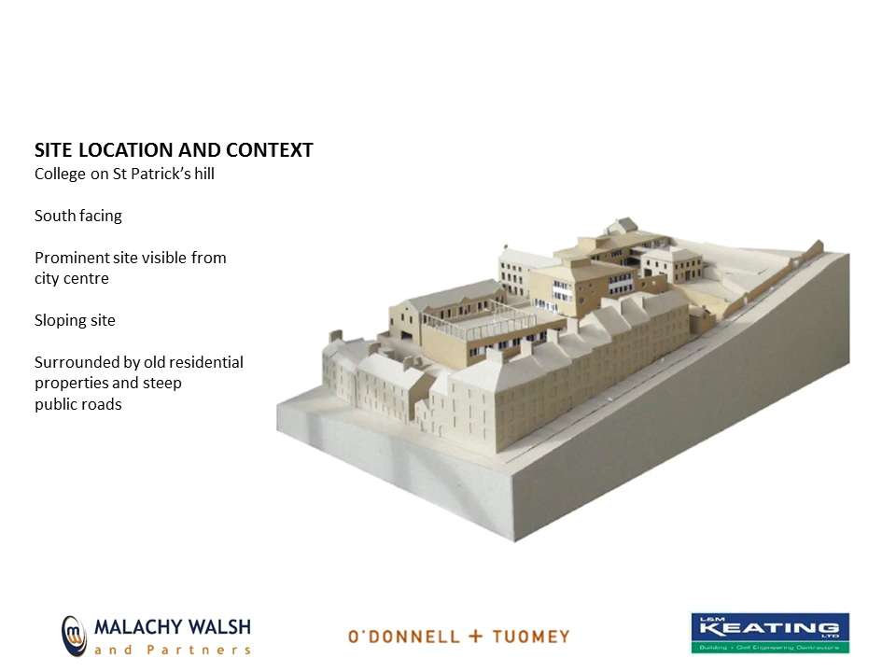This is looking from the south-east up the hill towards the college, and the darker cardboard buildings are the new and existing buildings. The site is very, very stepped due to the steepness of the topography, and it was a real challenge for the architects to fit in all of the square area needed for a college of this size and work within the department's area schedules to convince them that it could be done to a modern standard.

It's a prominent south-facing site, and you can see there's buildings on the south, which is the lower left-hand corner, buildings the whole way up the east side of the site on Patrick's Hill. There's a public road on the far side, on the west, and there's a private property very tight to the northern boundary of the site as well.

Just to give you a feel for where we are in relation to, that's Patrick Street, the main thoroughfare, the main commercial heart, if you like, of Cork City Centre. And the site is visible from pretty much most of the city centre. So I think the architectural design and the finished product really was very important to get right. And the architects worked very hard to do that.

Again, just to give you another sense of the tightness of the site and the slope of the site. Patrick's Hill is on the far side. The buildings there, just running up here, and this is Richmond Hill on that side. So you can see the site and the neighbours. Communication during the design development phase was very important for the design team to get right, because if you didn't get on with your neighbours here, the project wasn't going to be successful. And I think to date we've managed that between us all.

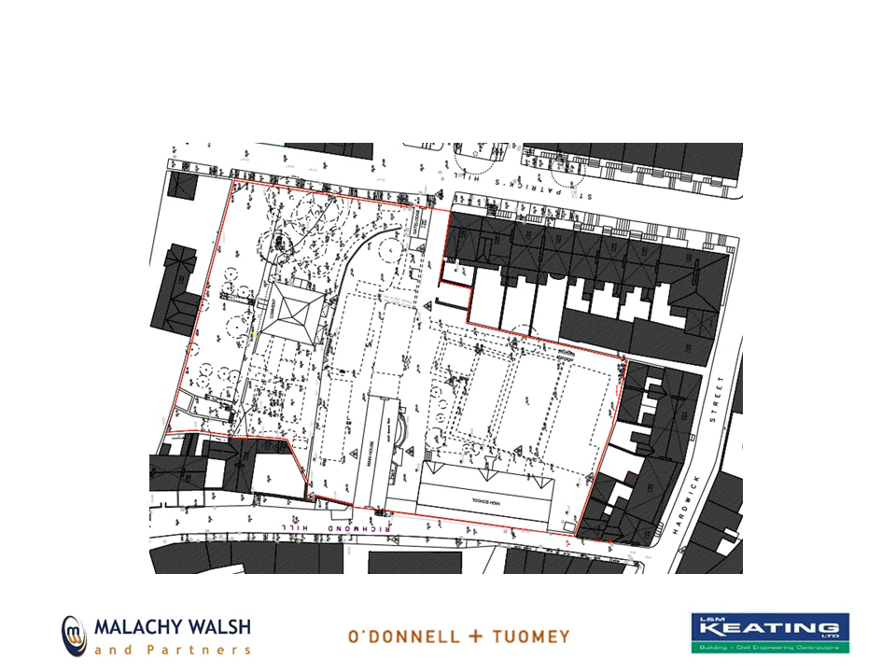Site constraints and challenges. Access onto the site is via a 4 metre wide, at its widest, road straight off Patrick's Hill, where the hill is at a slope of 1 in 4, so it's an extremely steep part of Cork City. So getting onto the site, David will go through that in a minute, has proved very challenging, and even in terms of site investigations and everything that had to happen during the school academic year, it made things very difficult.

All the boundary walls are old listed masonry walls, random rubble masonry walls, most of which had no foundations at all under them, and part of this project required that we would dig up to 6 metres, I think, was the deepest excavation, within a metre of these walls that had no foundations under them. And these walls aren't owned by our client, they're part owned by our client. So the party wall issues and the third party property owner issues were very important to get right.

The listed buildings, there are 4 buildings, they're shaded on this sketch here, and those buildings were kept during the construction and have been amalgamated into the overall design and final use of the site. So the project really involved civil engineering in terms of excavation and underpinning, careful restoration of existing listed buildings, which had the conservation officer in the city council carefully involved as well at times, in terms of agreeing with him the detail of how we would do that.

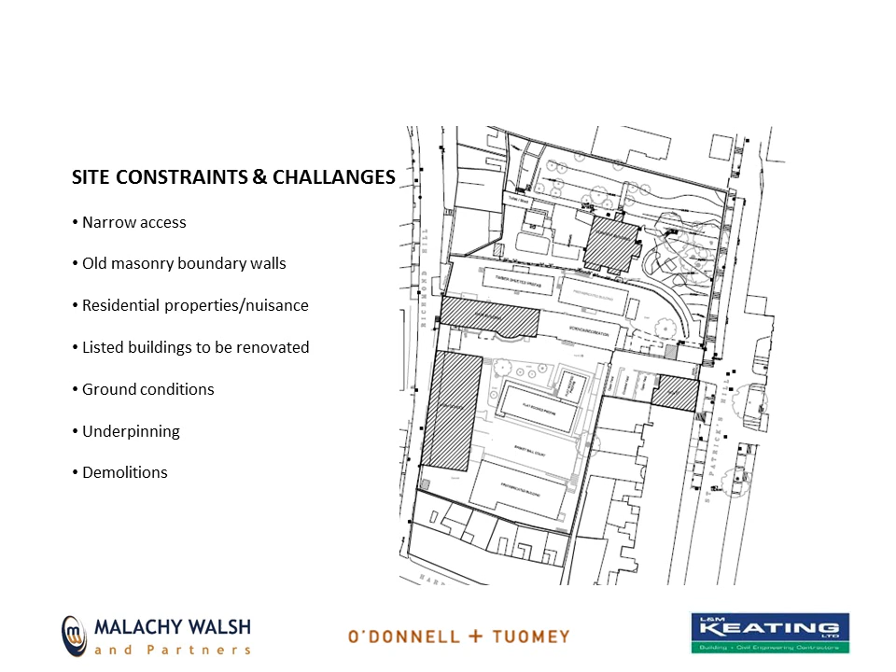There's a PE hall with a playing surface on the roof, and there was a bit of negotiation with the department. They have a rule, as I understand it, where only 10% of the roofs can be flat roofs. So we had to convince them it wasn't a flat roof, it was a playing surface. So that took a while to convince. But all of the other new roofs are pitched roofs on the site.

There's a 4-storey science block, which goes to 6 storeys actually. It has 2 below the ground and 4 above the ground in one part of the site. There's a new arts block, which is between 1 and 4 storeys, again 2 under the ground and 2 above. There's an escape stairs building. There's link bridges between new buildings and old buildings. And there's the alteration and upgrade of the 4 listed buildings, as well as external works. They're the main, if you like, engineering elements of the project.

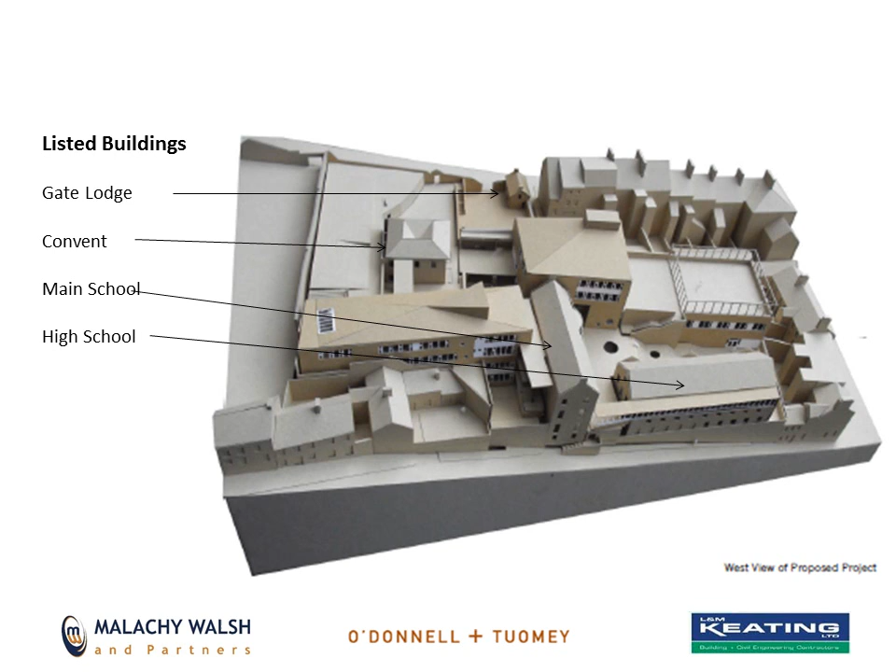The new buildings and external works essentially split into those sections. You can see there the new entrance from Patrick's Hill, incorporating a car park and new retaining walls, a 4 to 6 storey science block, PE hall with external playing area on the roof, the arts block, which goes from the very back north edge of the site and steps down over a number of levels to meet the back wall of the old main school.

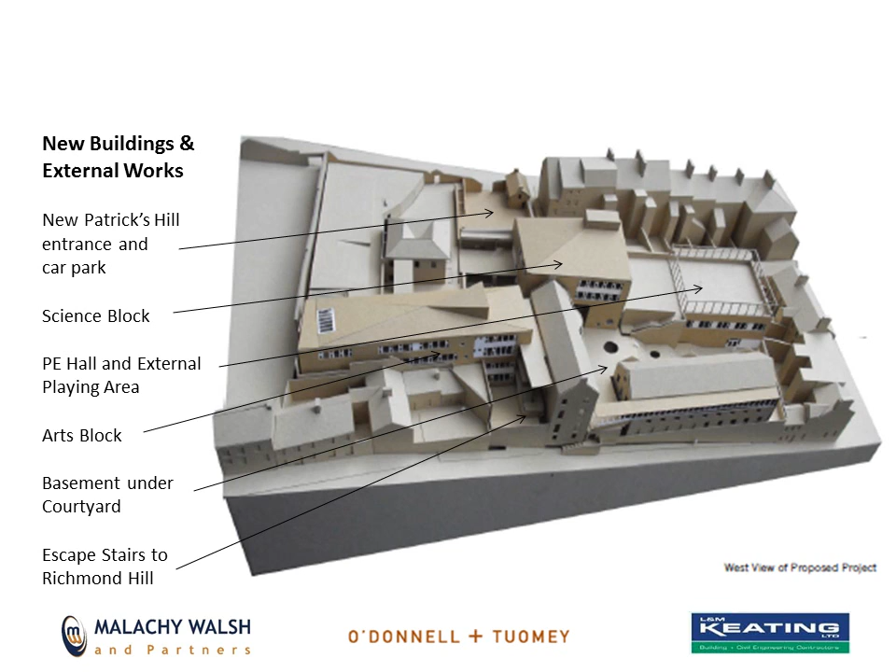Cork has 2 types of rock. You've got red sandstone on the north side of the River Lee, and you've got karst limestone on the south side of the River Lee. And we're literally a couple of 100 metres on the north side on the escarpment that forms the northern edge of Cork City, that you can see right as you go into Cork from the Dublin Road. You see it right from Tivoli, through to Sunday's Well and the Lee Road. So the north edge of Cork is formed on this cliff, if you like.

So in places we were digging out rock up to 4 or 5 metres, and in other places our foundations were 3 or 4 metres above the rock level. So that in itself was a challenge in terms of differential settlement for new structures on the project. And we'll explain how we overcame that.

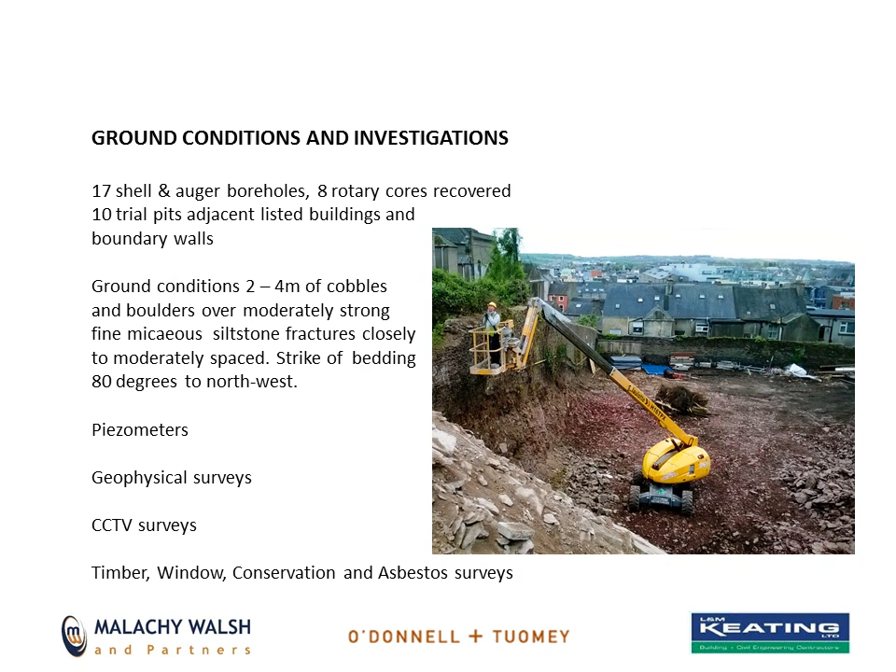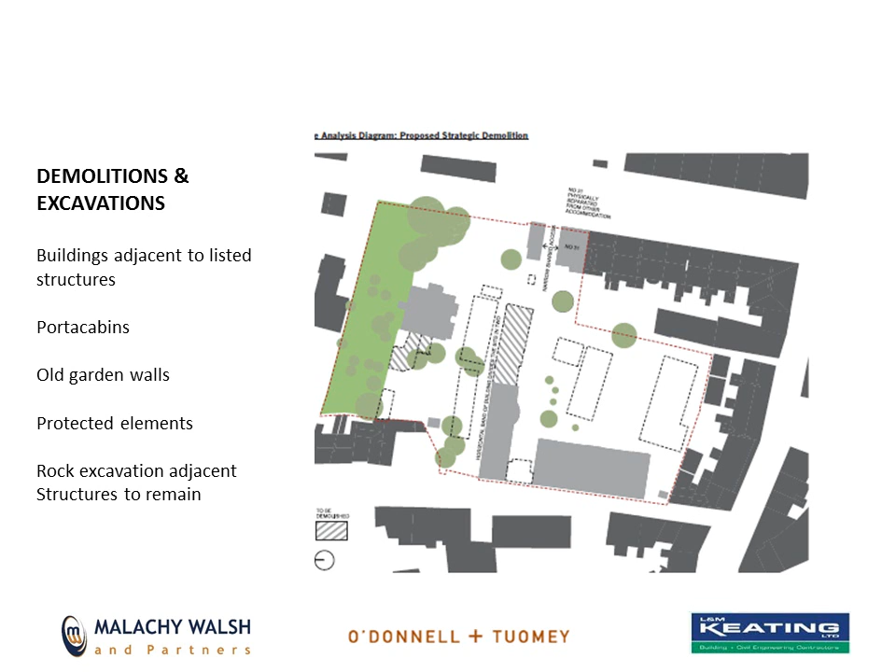Some of the buildings were adjoining old listed buildings, but the structural connection was almost non-existent. So really, I don't think the demolitions were that difficult. Probably the easiest part of the job. I suppose just to get into some of the detail and give you a flavour for the approach that was taken to temporary works and construction.

So with the contractor, we came up with a temporary works design to support the arches, literally hold up the wall, put in permanent works steel beams for a new first floor structure. We put those in early because they gave us temporary lateral bracing on the building, and we got agreement with the conservation officer and the city council to replace the brick piers in this building, and that allowed us to underpin the walls by making a new foundation under those piers, rather than trying to hold the piers in place and get a foundation under them and extend that.

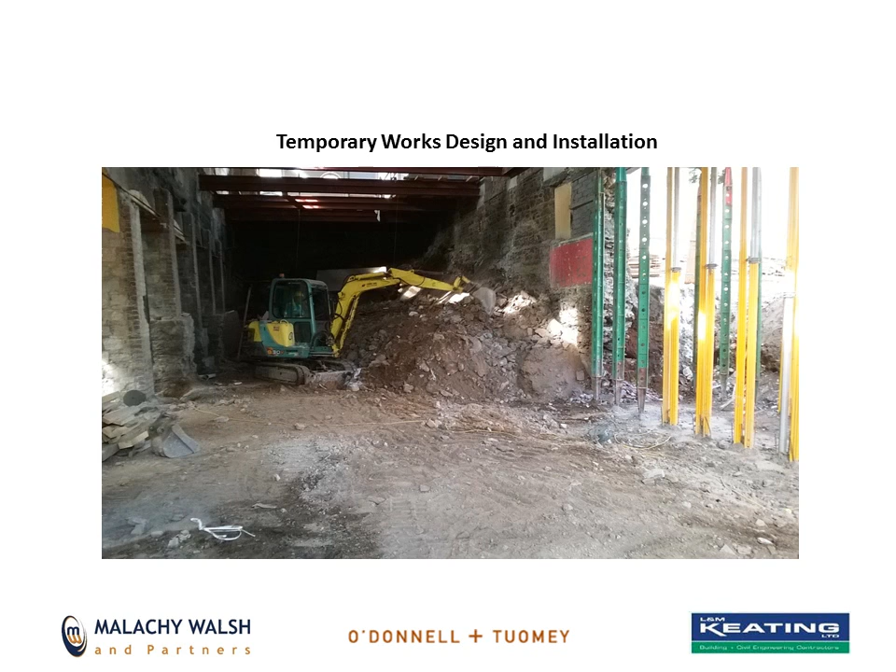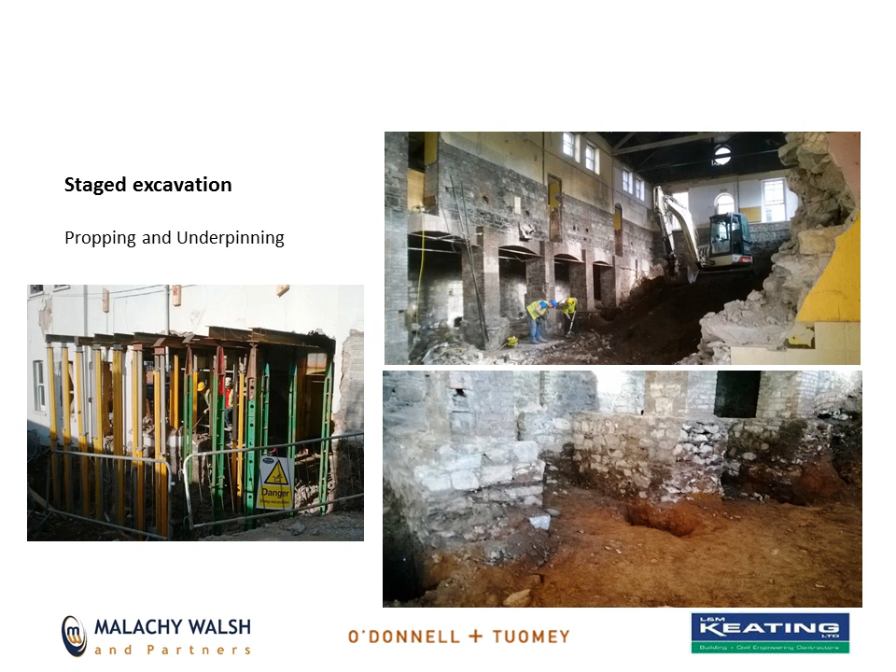Just a general shot to show you the level of excavation that had to take place, and some of the temporary propping that you can see there on your right. So a good bit of care had to go into the whole construction sequencing there to make sure that was done right. Again, just some other general shots showing the propping and underpinning, using tried and tested traditional techniques for needling walls, holding walls up above where you want to put your new structure, and then traditional underpinning.

The main school, which is the original building on the site, again, you can just see a bit of the scale. The original ground level is this line here, and we had to excavate down to the bottom of the wall, and we had to go another maybe 1.5 meters or thereabouts to get down to our formation level. You don't see these walls until you go at it, and that's just the way of life when you're dealing with old buildings.

Until you actually build it, you're not sure exactly what you're going to find. So I think one of the secrets to it really is a high level of engagement with the contractor, so that you're constantly reviewing what you're finding, and you're progressing construction techniques that are buildable in terms of the program and cost, etc.

And here you'll see this is traditionally underpinned. I think a lot of this actually is some of the tanking. There's a basement behind the other side of this wall, but we traditionally underpinned here using letterbox shutters in a hit and miss stage sequence to bring the walls down to a good bearing surface on rock. So again, tried and tested techniques in a lot of places there.

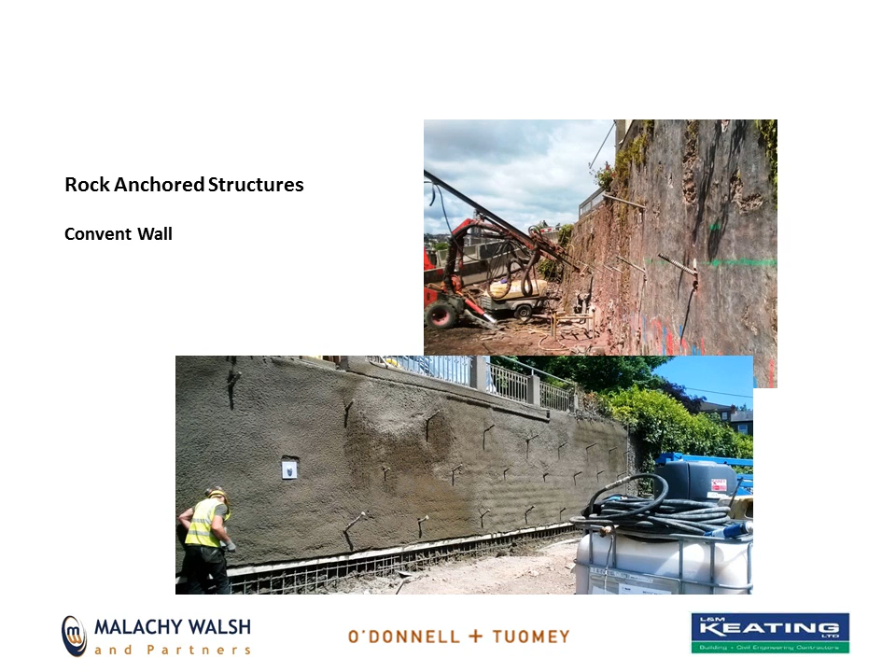So those rock anchors went in, and they were really only needed for probably 3 or 4 months, as the main building was built in front of it. Those walls are all in now, I think, David, at this stage. So that wall is now propped in the permanent case by the main structure. So those anchors are redundant, but I think it was the only way to do it at the time.

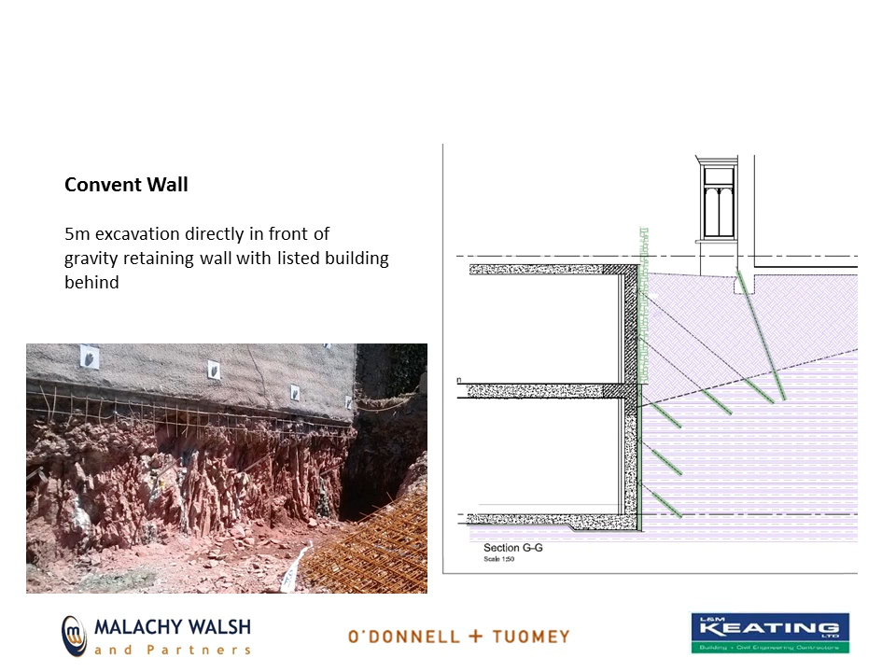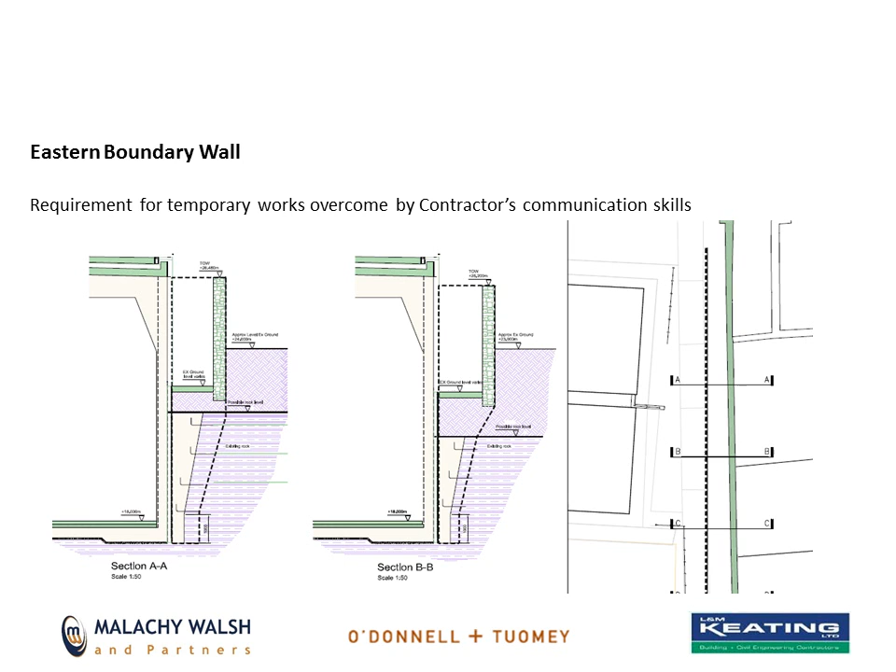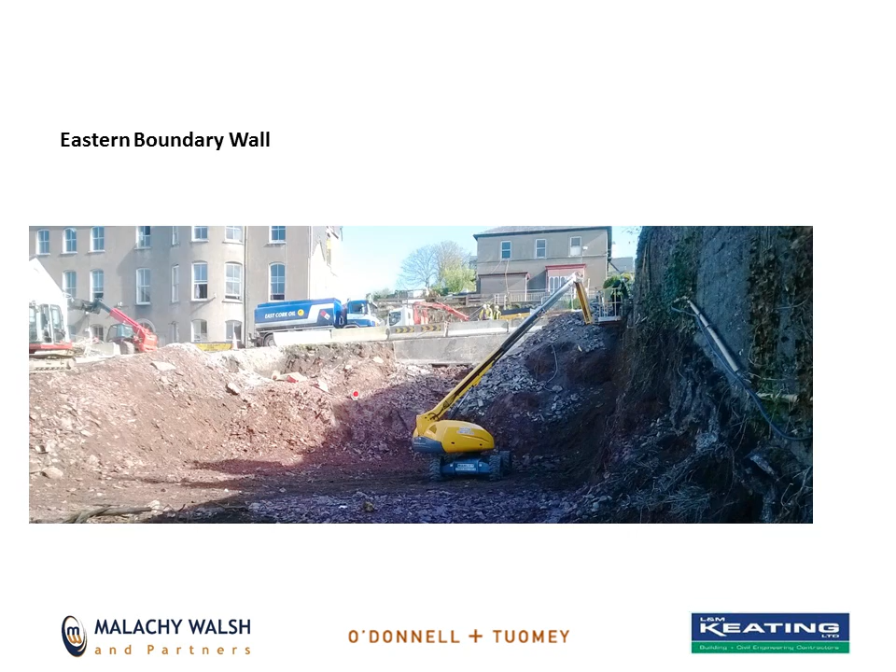Retained buildings, I suppose this is just a general view showing the typical type of intervention. There's a new basement where this little mini digger is here. There's a new basement structure going in. It's probably got another metre or two, probably 2 metres to go down before we link into the front of the old main school there. So again, a lot of intervention and carving out new openings and propping and supports.

And then the photograph at the bottom, just a general view again, that's the old main school on my side on the left, and this is the new arts block. And the architects wanted the new clean concrete, completely unblemished, finished surface building to come straight up against the old stonework, so you had a contrast. And there's just a very, very small joint between the two, but they're completely separate structurally.

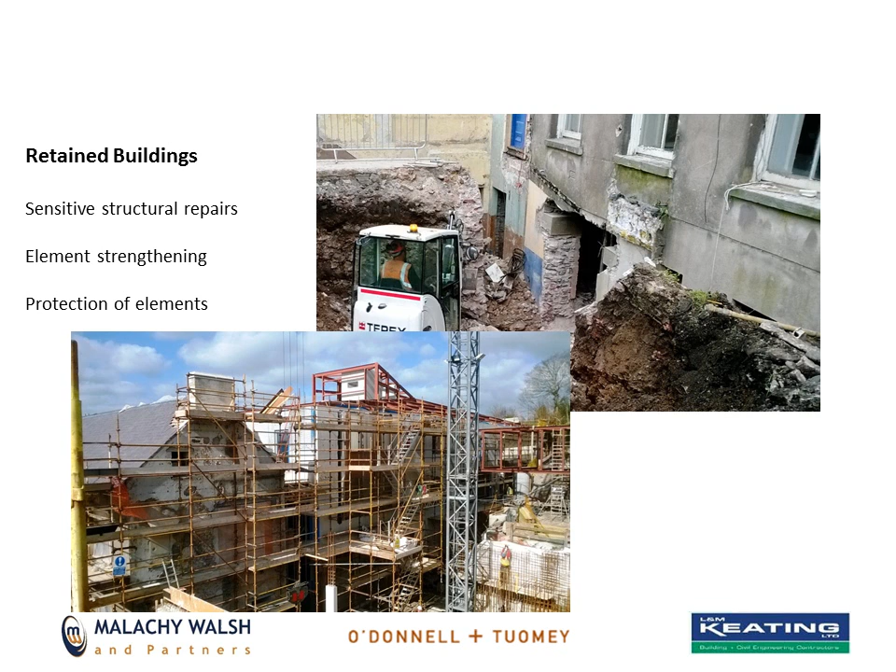Just a few general shots. That's the main school from the front in the middle there, and from behind you can see how slender and tall that whole building is. The building just on this side, just from here across, that was demolished. That wasn't part of the curtilage of the listed building. So that was demolished, and we've built in and wrapped right around on 3 sides with our new buildings around that building.

There were listed stairs that had to come out, and new floors went in, and strengthening of existing floors and assessment. The assessment of the old floors is interesting because these buildings were built using very strong hardwoods that used to come up the river, and we've done a lot of old buildings around Cork, and actually the strengths you can get out of the timber are way in excess of your C16 and even C24 timber. And the timber is in excellent condition. So, it was actually very easy to work around the older elements of the buildings.

Then we found some of the more modern interventions were in a poorer condition than some of the older elements. And I think there's a lot to learn there in terms of the old trades and how they used to do their work.

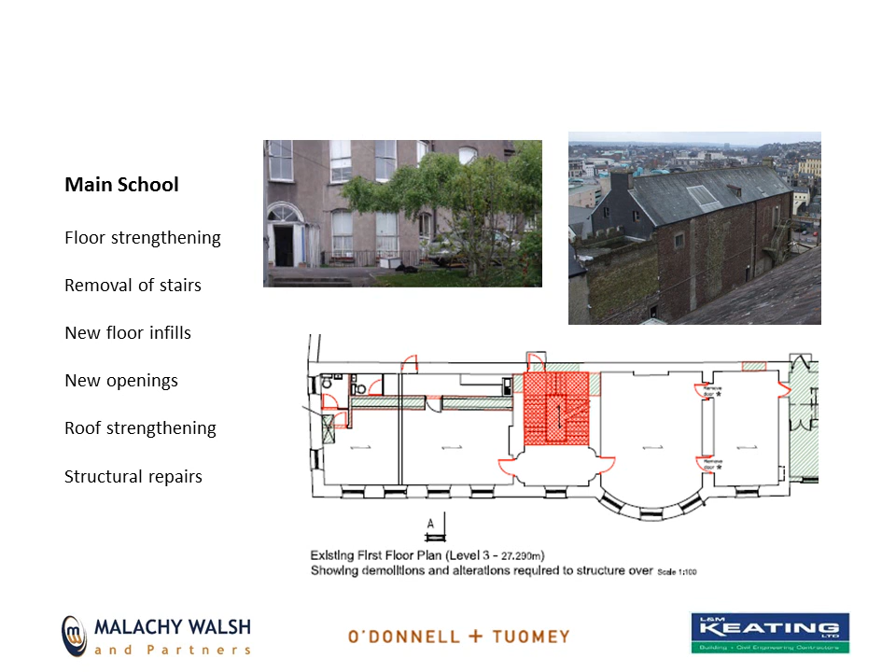The main school, just a general view again of this, the top picture is a view looking down the western boundary of the site, and that's a listed facade. So anything we did had to treat that very, very carefully. But it's in very good condition, and really I don't think that wall needed any structural improvement at all. It's absolutely fine as it is and always has been. Again, a testament to the original builders.

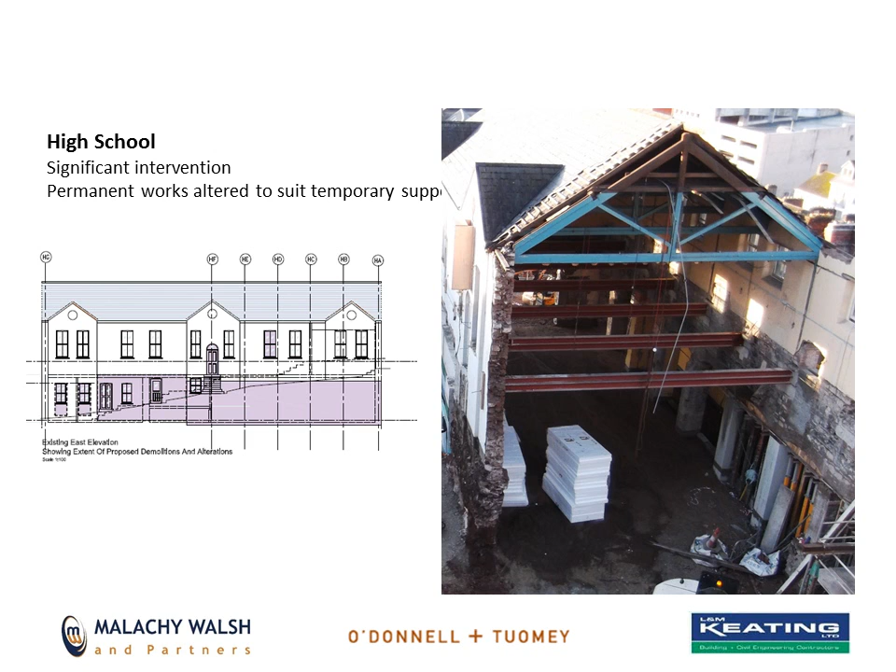So they just had to be convinced that from the new car park into the school, that was Part K compliant and Part M compliant. But the minute you came to the gate and came out, we just couldn't meet those requirements, and they had to accept that.

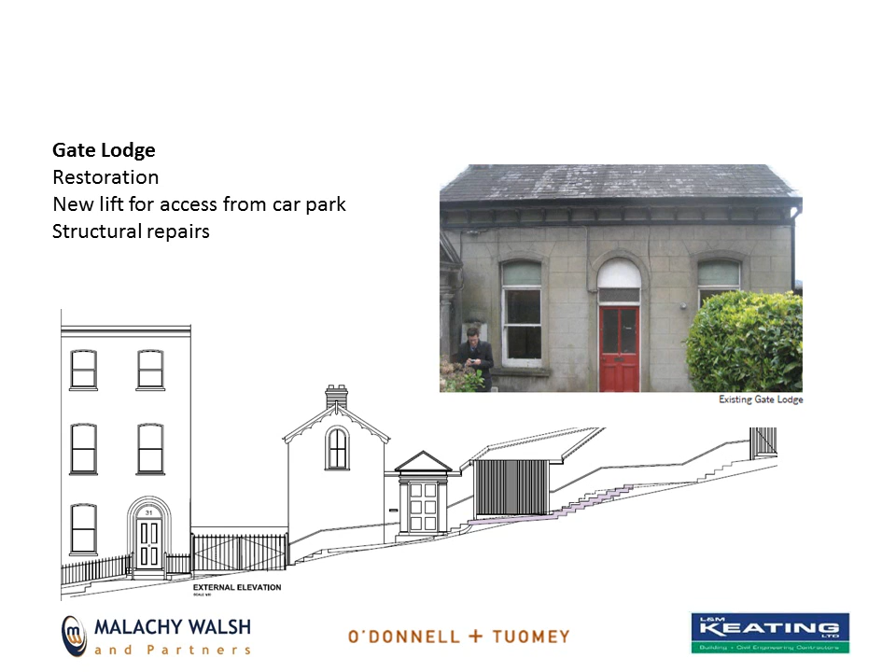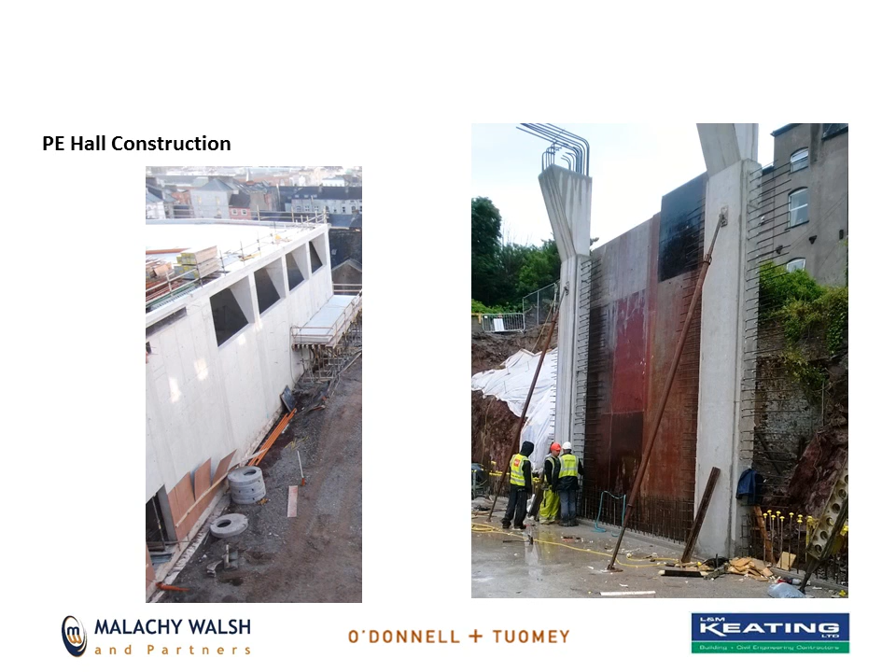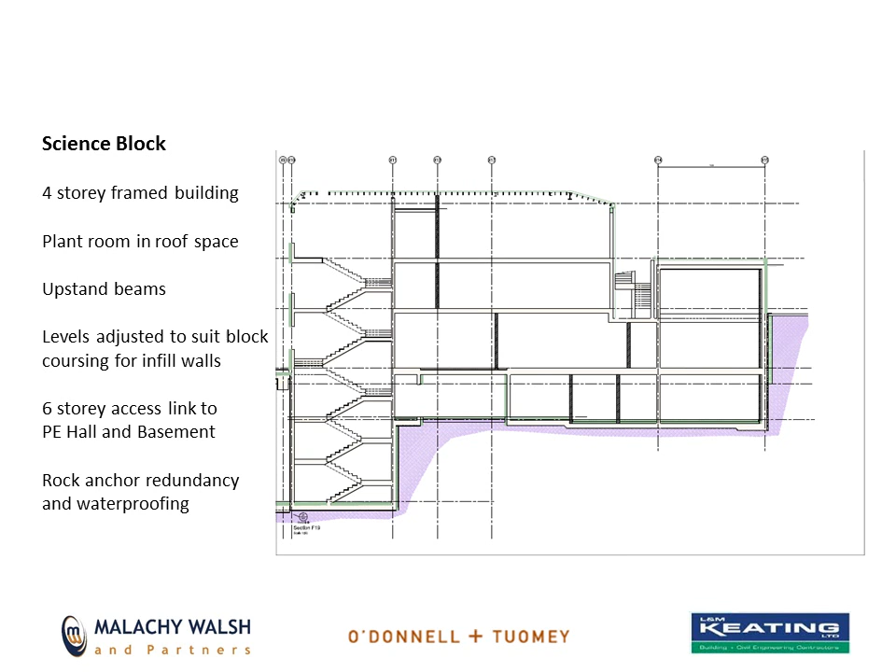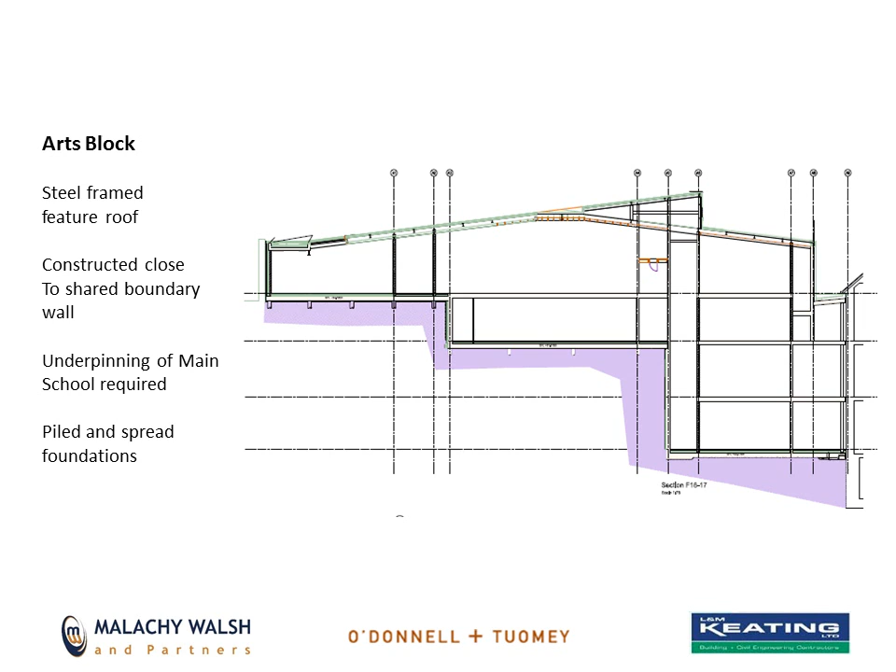Now the piles aren't there for weight. There's no real weight on those piles, but we were just concerned about differential settlement, so we kept it fairly simple. You're either on rock, you're on lean mix on rock, or you're founding on piles, so that you're not getting differential settlement. So the upper two steps there were piled, and then we were down into rock bearing foundations from there on. That was the only part of the project that was piled.

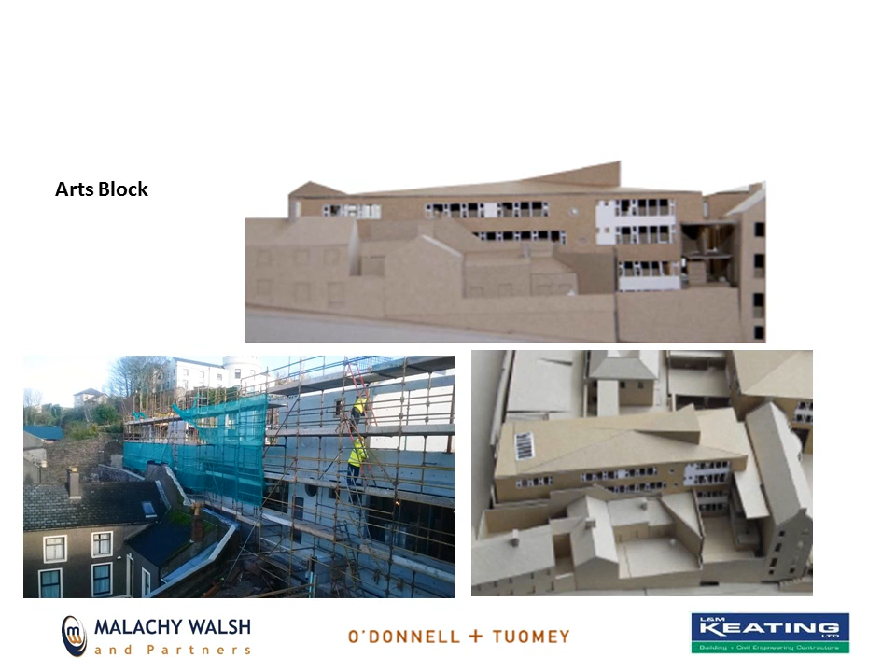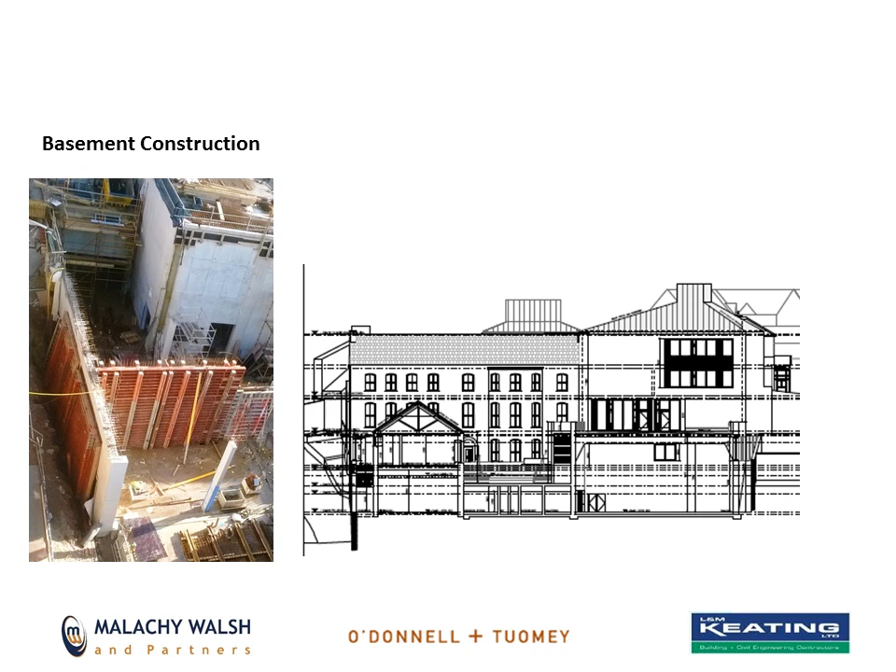Okay, thanks very much. I hope I haven't gone over my time. I'm going to hand over to David. Thanks a lot.

Good evening, everyone. My name is David McCarthy, and I'm working for L&M Keating, and I'm the project manager on the St. Angela's job in Cork.

So L&M Keatings, we're a building and civil engineering contractor. We're based in Kilmihill, County Clare. We also have a regional office here in Dublin. The company was started up in 1987 by Louis Keating, who is a fellow of the Institute of Engineers. We're operating in Ireland and the UK, about 80 direct employees, and turning over in the order of 40 million and continuing to grow.

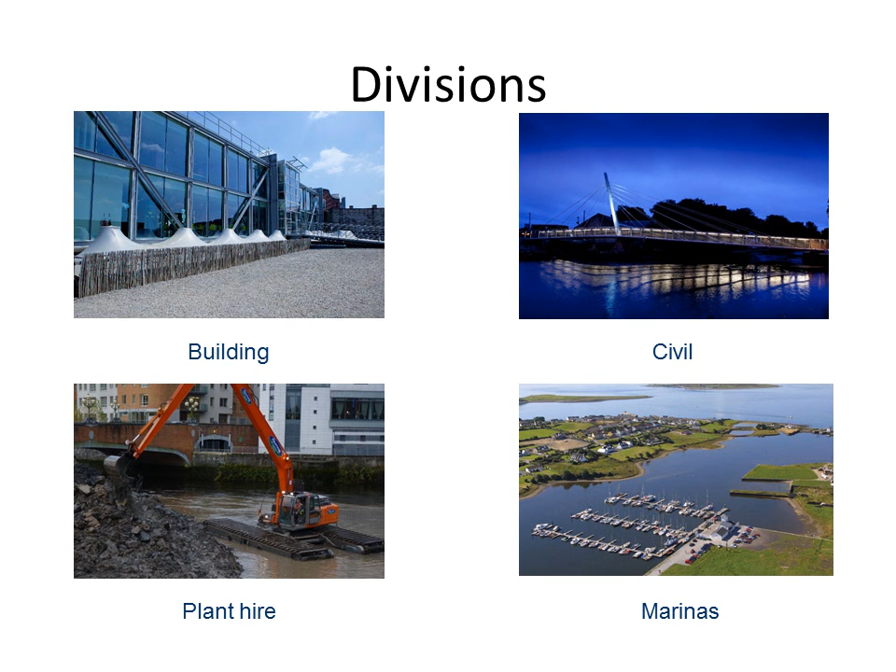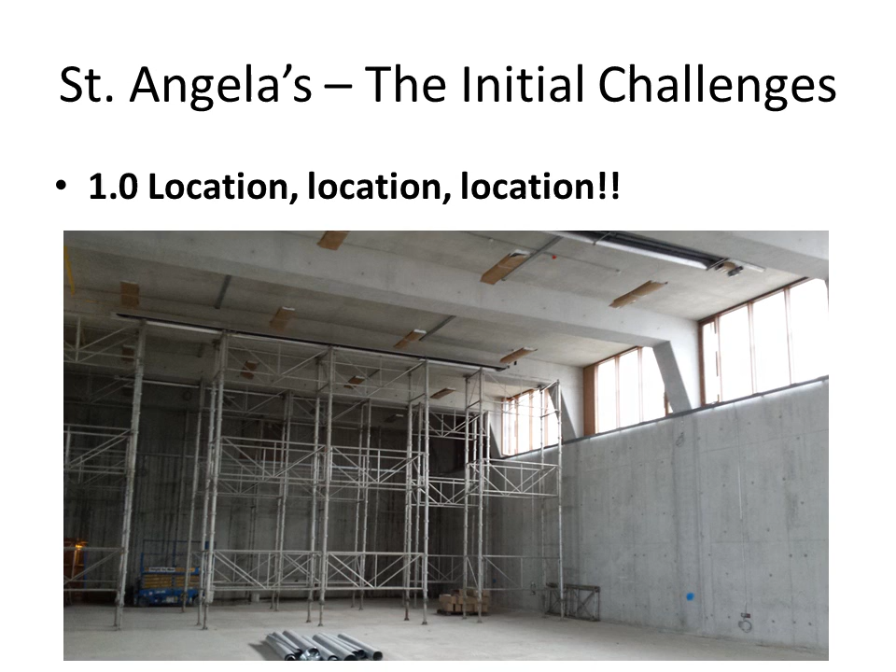In fact, we've had to use part of the permanent works. We've used the roof slab of the PE hall as a temporary lay-down area and work area. So we've gone through some temporary works designs to improve the load-bearing capacity of the north section of the roof and used it for storage after that. Access is from St. Patrick's Hill only. It's actually too tight for artics. We can't get any artics onto the site, which does cause numerous problems, in particular for the reinforcement steel. All the rebar is bent in Dublin by our supplier. It has to be transported by artic to Cork, transferred at their depot to rigid trucks, and then brought onto site as required.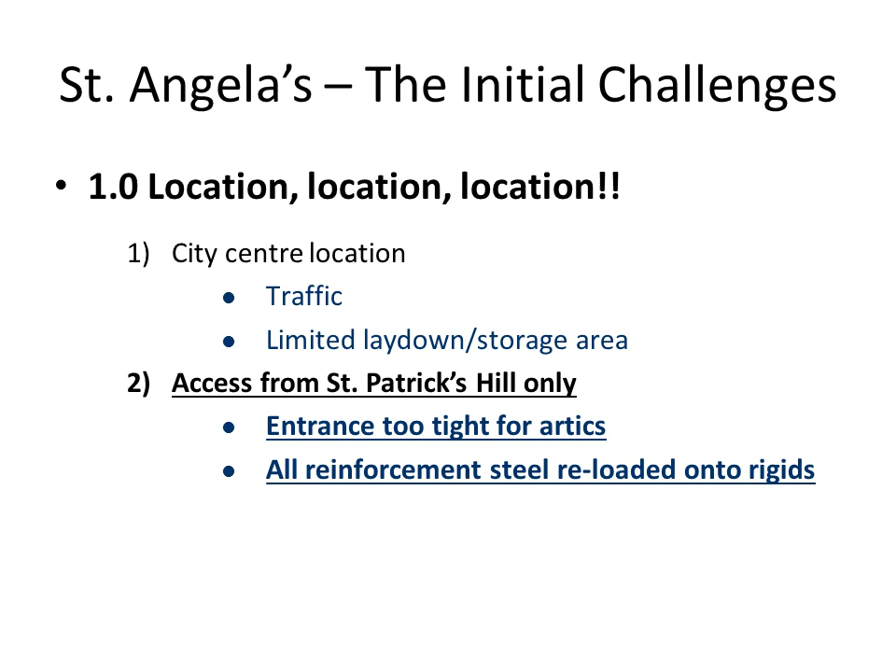We're also bounded by private residences and schools, which causes difficulties from the point of view of noise and vibrations. There's a high pest factor, if you like, in continually rock breaking and creating noisy activity on site over several months. There was a prolonged stage of rock breaking on the site.

So we are very grateful to our neighbours that they have been patient with us. But we have made concessions also, particularly to the schools. There's about 5 or 6 different schools within a stone's throw of the site. So during exam periods particularly, we have made concessions to suspend very noisy work to more suitable times.

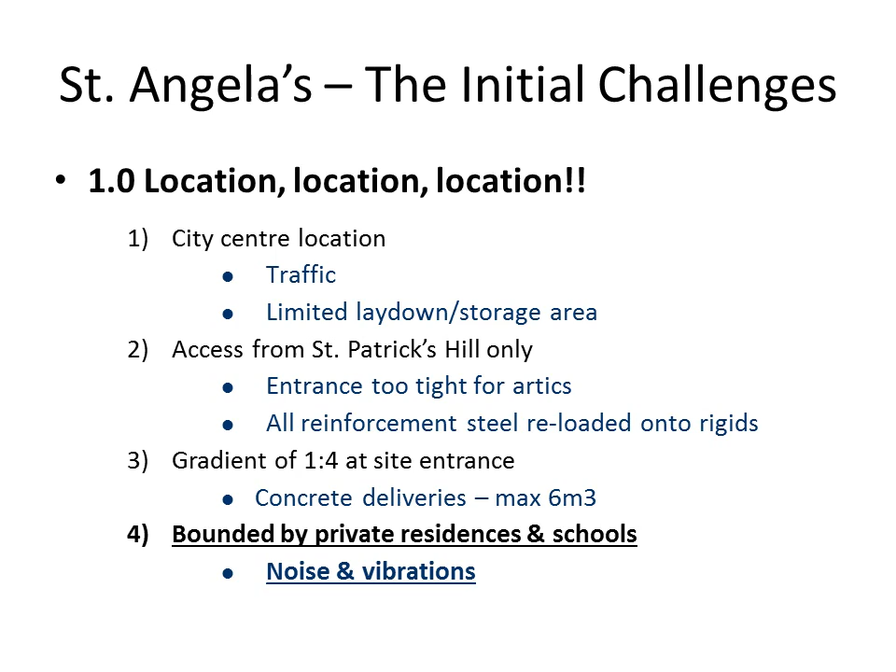The topography of the site is steeply sloping, as John has elaborated on earlier. There are in fact 5 distinct formation levels in close proximity, so there's essentially shelves cut into the side of St. Patrick's Hill to take the structure. And the proximity of these various formation levels means a requirement for a lot of retaining structures between these formations.

I'm just showing a section here which John probably has shown earlier. Apologies for a bit of duplication, but I'll try to concentrate on the construction element if possible. This is a section cut north-south through the site. So down the left-hand side you can see the south end of the high school with its ground floor level at level 1, and then up at the right-hand side we're looking at the north end of the arts block. And the formation level up the north end is at level 5.

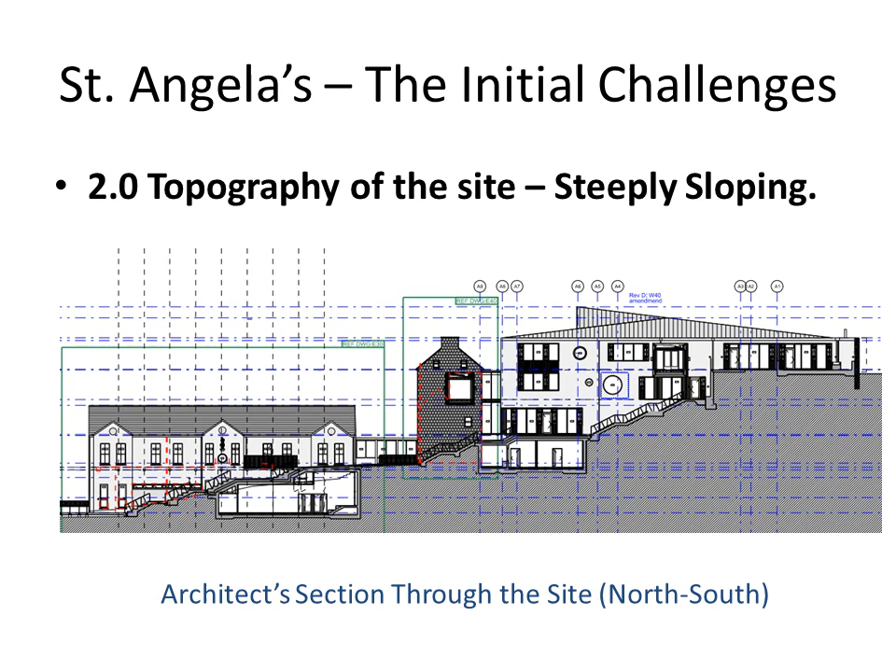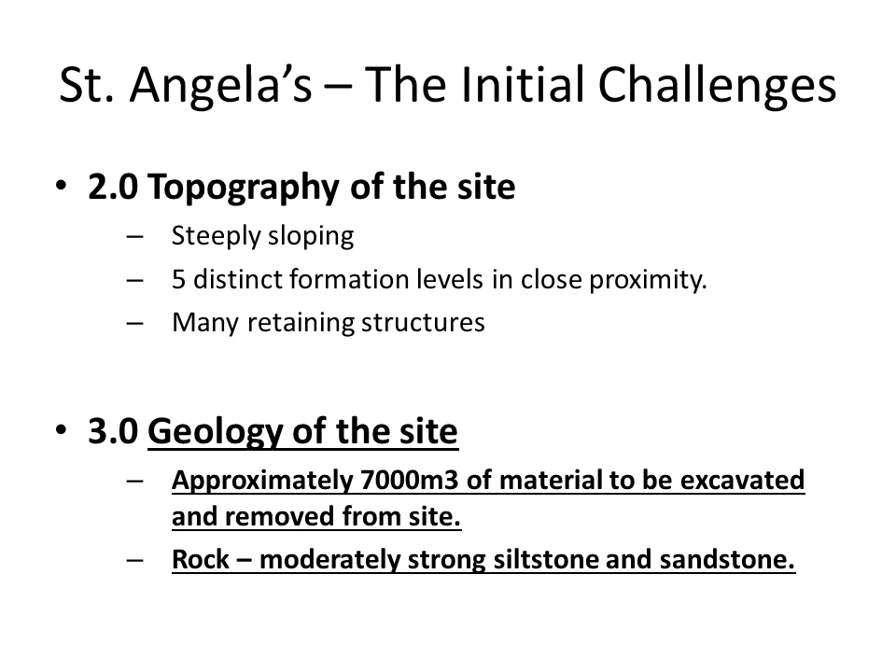Talking about the geology of the site, John has gone into the site investigation. There was approximately 7,000 cubes of material to be excavated and removed from the site. A large proportion of that material was rock, about 50% of it was rock. The rock was, as John described, moderately strong siltstone and sandstone, and that's what was borne out in construction stage. That was the type of rock we were encountering. So there's a photograph just to show the excavation almost complete for the science block and PE hall.

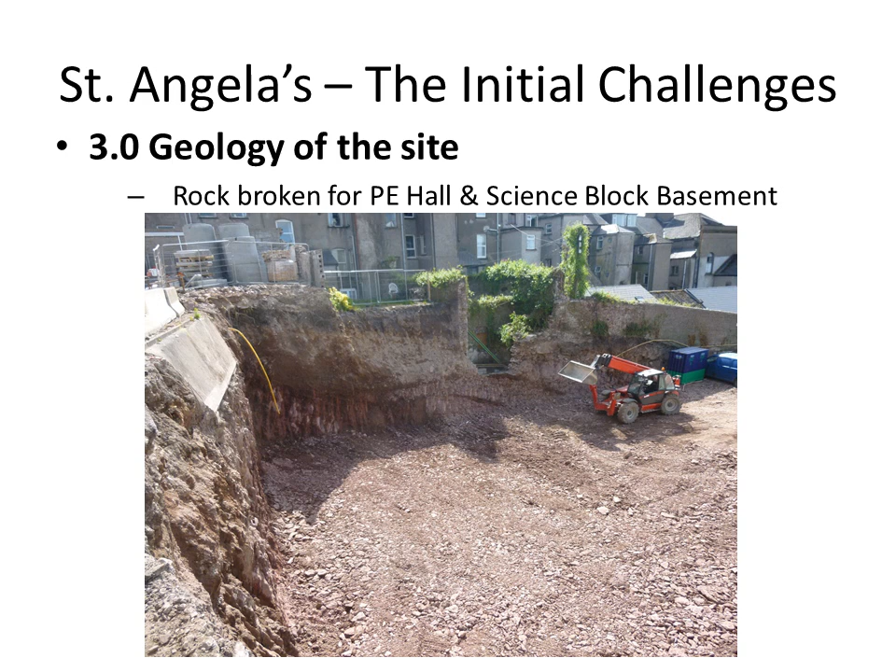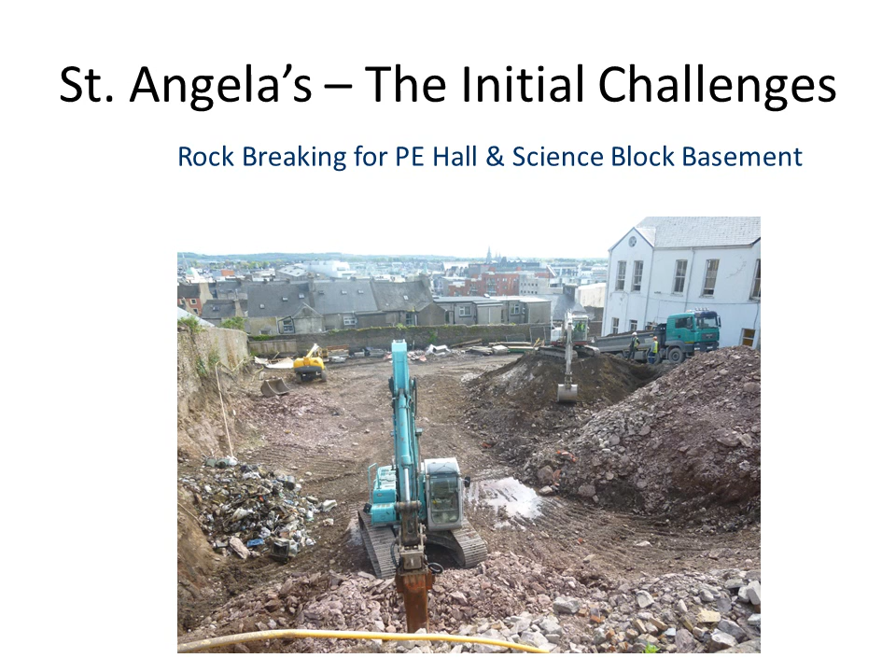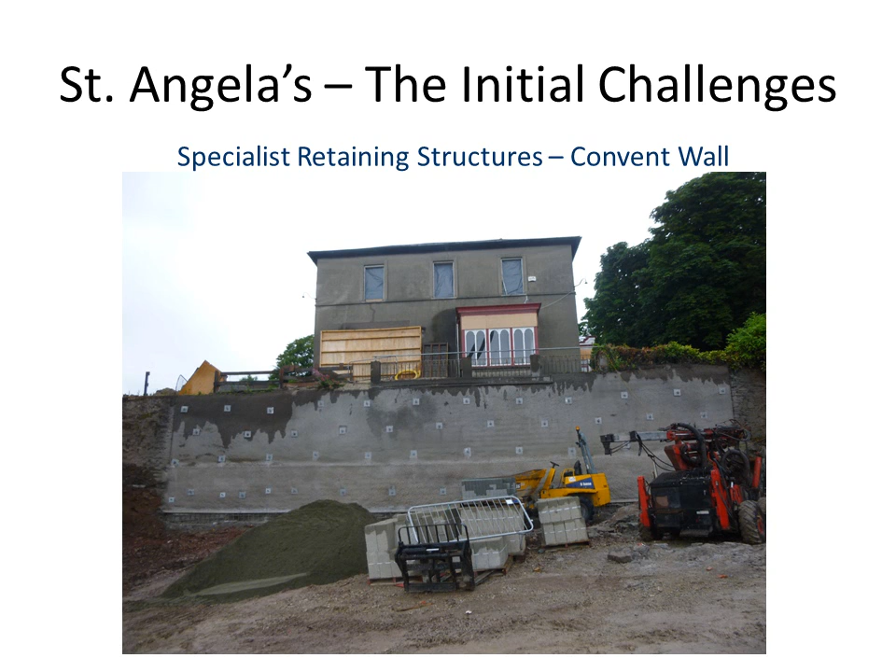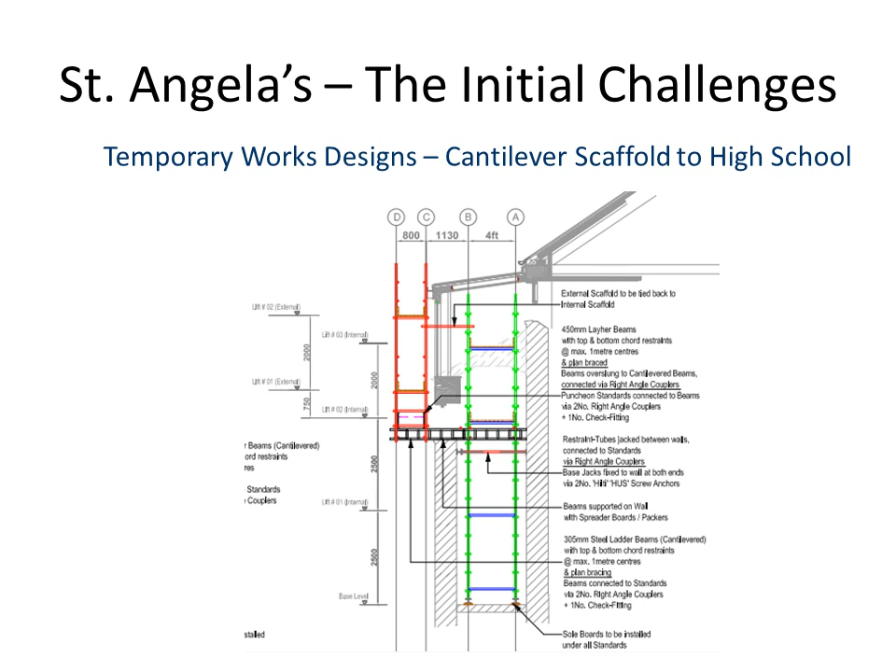In this situation, this building is bounding a public road, and the road was too narrow to allow us to hoard off and build scaffold from the ground up, from the road up. So we had to cantilever it out through windows on the upper story. And there is a photograph of the scaffolding in place, or partly in place at least.

Large in situ RC structures made more difficult by the high quality fair-faced finish that was demanded by the architect. Apologies for the quality of the photograph here, but this is essentially a photograph of a typical corridor. So you can see we're looking at fair-faced concrete to the wall, to the soffit overhead, and in this situation we've an in situ RC bench as well, which is also completed in fair-faced concrete.

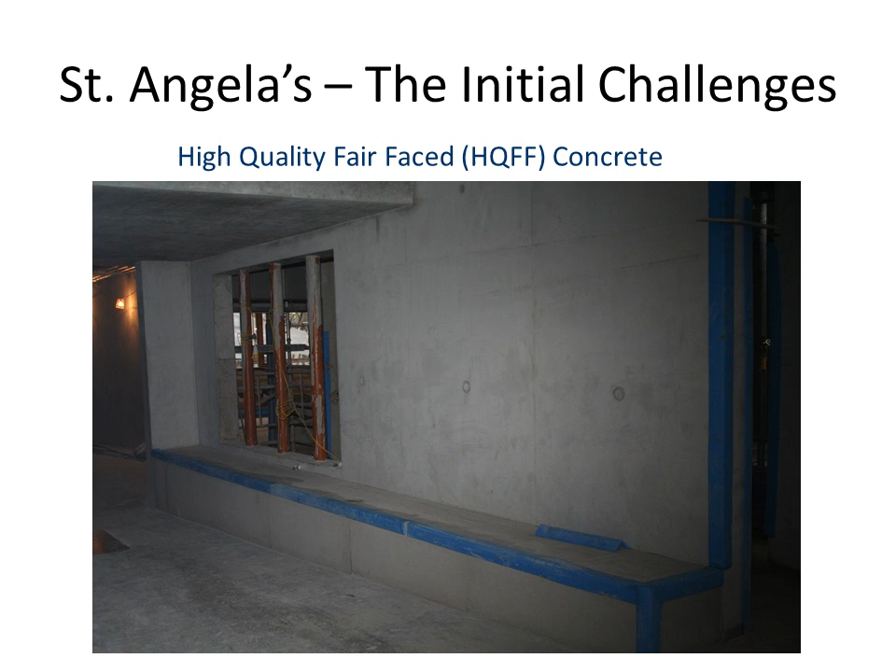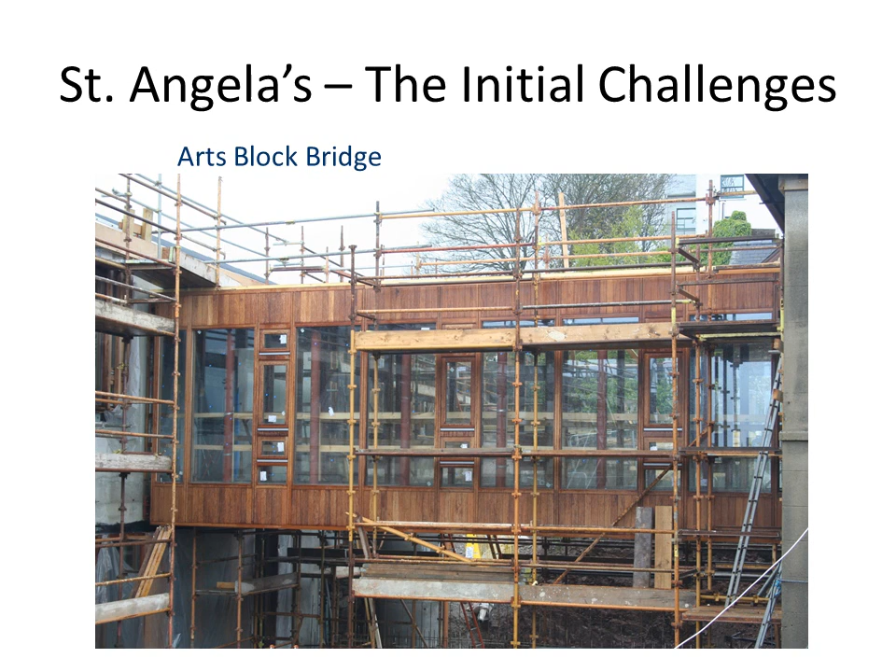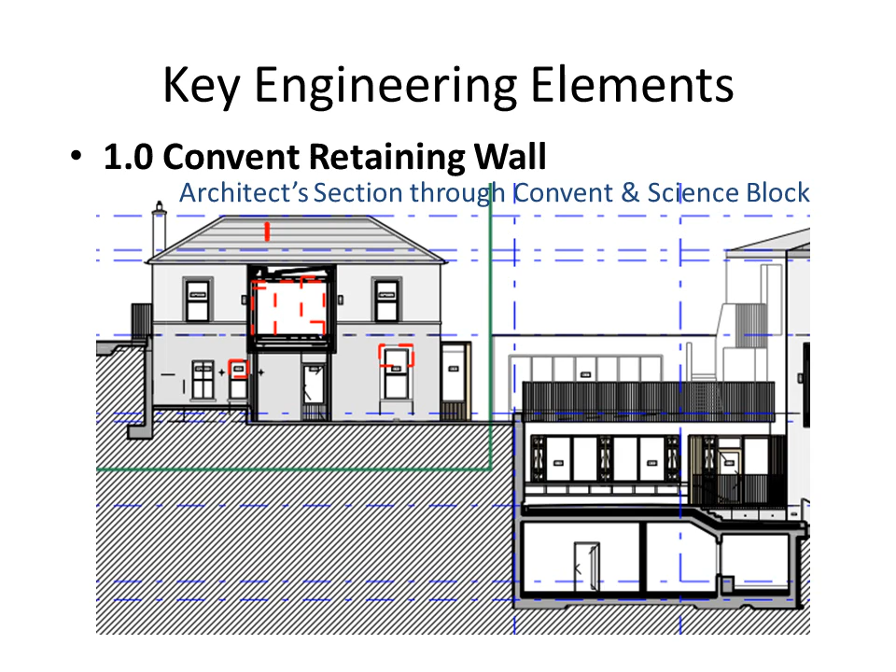This is the retaining wall in front of the convent. This is a section through the temporary works design, which was a possible temporary works design suggested by Malachy Walsh. So you can see the anchors, and you can see the double height basement which has to be excavated directly in front, just 2 metres in front of the existing convent building.

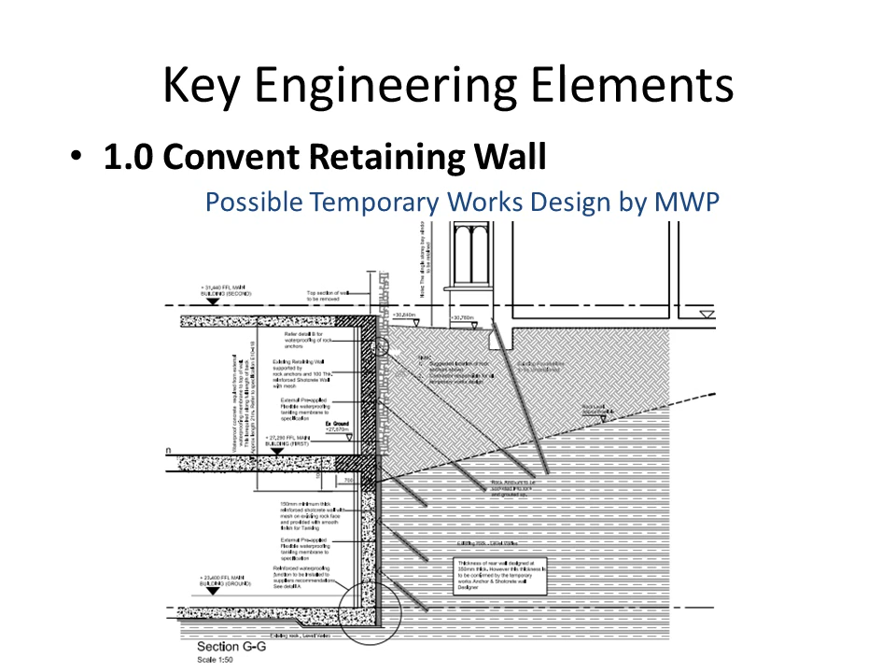Here's a photograph which just indicates what we were dealing with before we started works in this area. So you can see there's an existing stone wall about 3.5 metres high in front of the convent at this stage. We then had to come along with a drilling rig and install rock anchors along the wall.

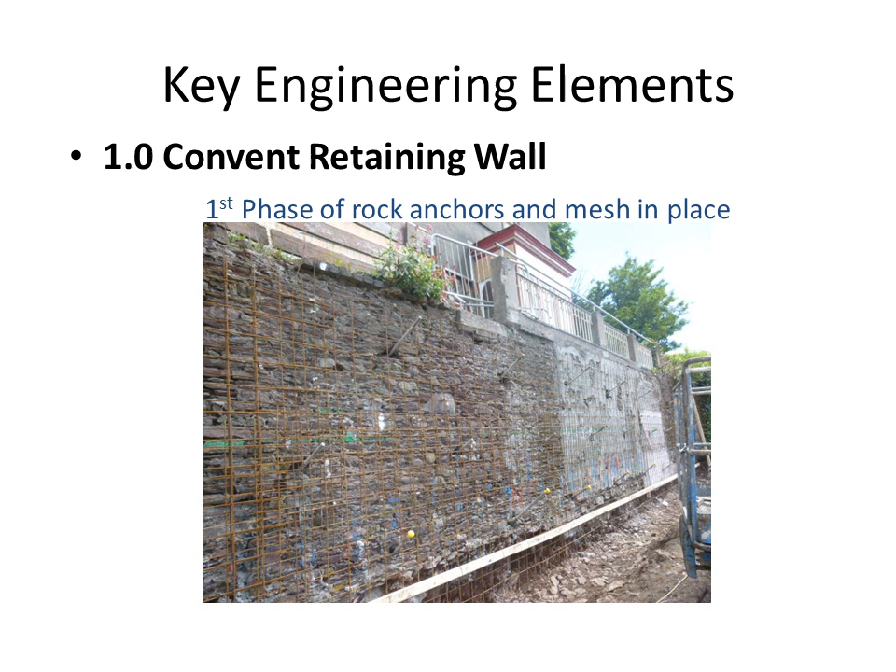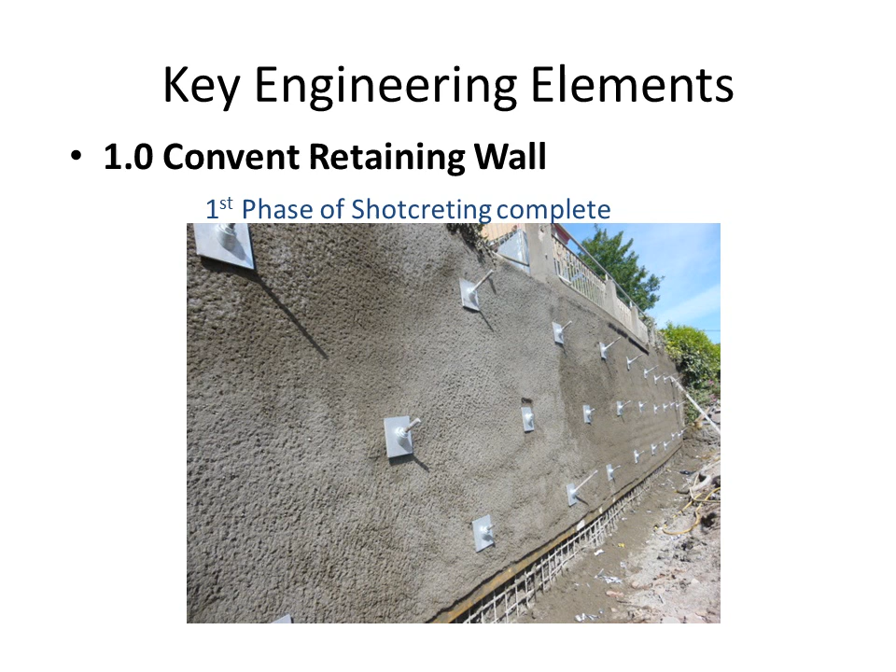This was followed up by mesh, which was put in position and tied in position. And then the wall was shotcreted, and there were plates and nuts fitted in position to stabilise the whole structure. Once that was completed, we could then proceed with phase 2, which was to dig out the rock underneath the wall to take the formation level down another approximately 2 metres below the bottom of the shotcreting.

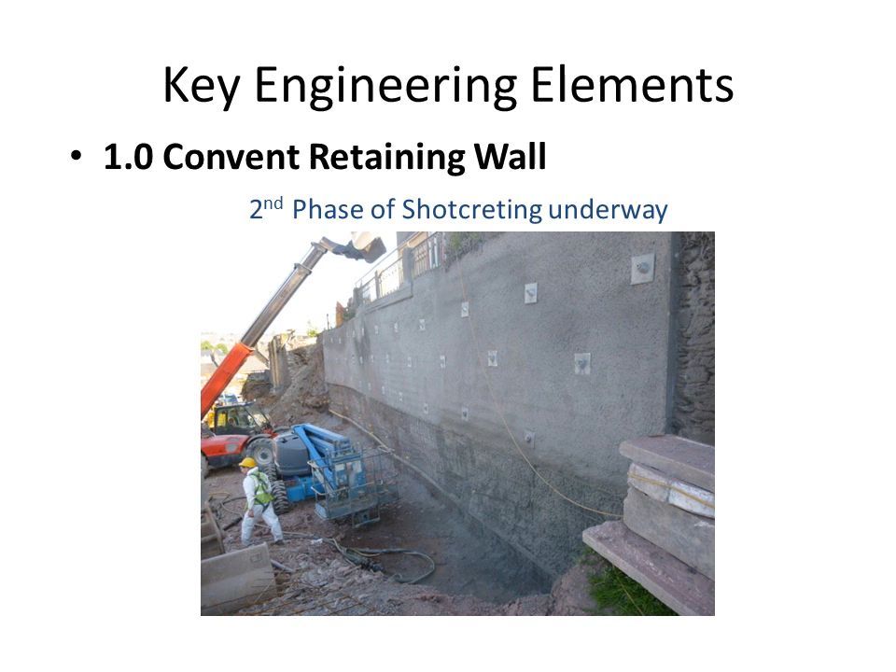And once that was completed, we were able to install the rock anchors again to help stabilise the entire area. And that was then again shotcreted. So once that second phase had been completed, and you can see the completed job here, what was being retained and the convent above was essentially deemed to be stable at that stage. So the temporary works were effectively doing what they had to do at that stage.

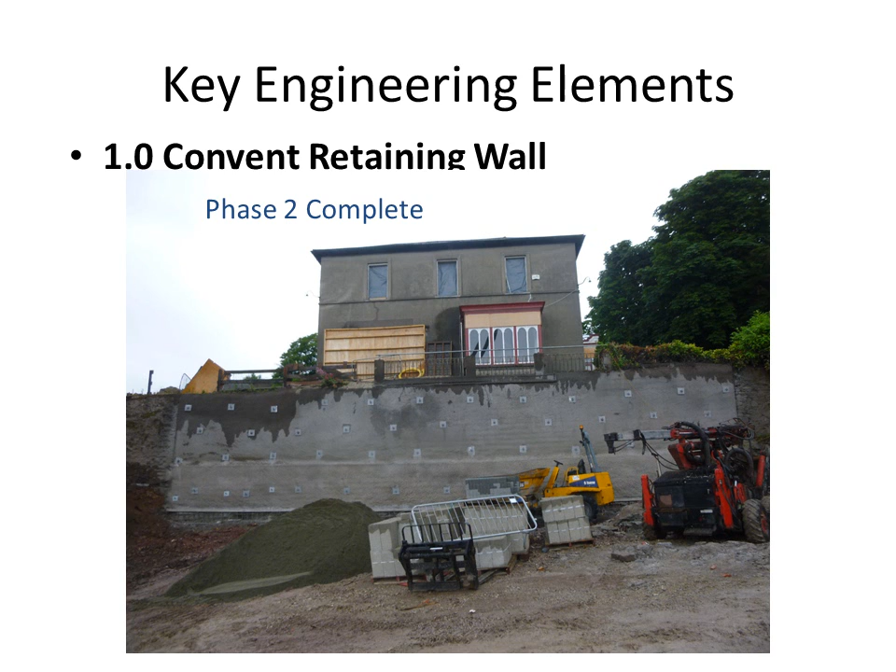And it was also agreed that the quality of the rock we were meeting at the foot of the retaining wall at this stage was of a good enough quality that we could just continue to take down the formation without carrying out any further retaining works. So here are just a few photographs showing the works that had to proceed after the rock had been stabilised. Here we're back blinding for the base of the science block slab, which has to be installed just in front of the convent wall.

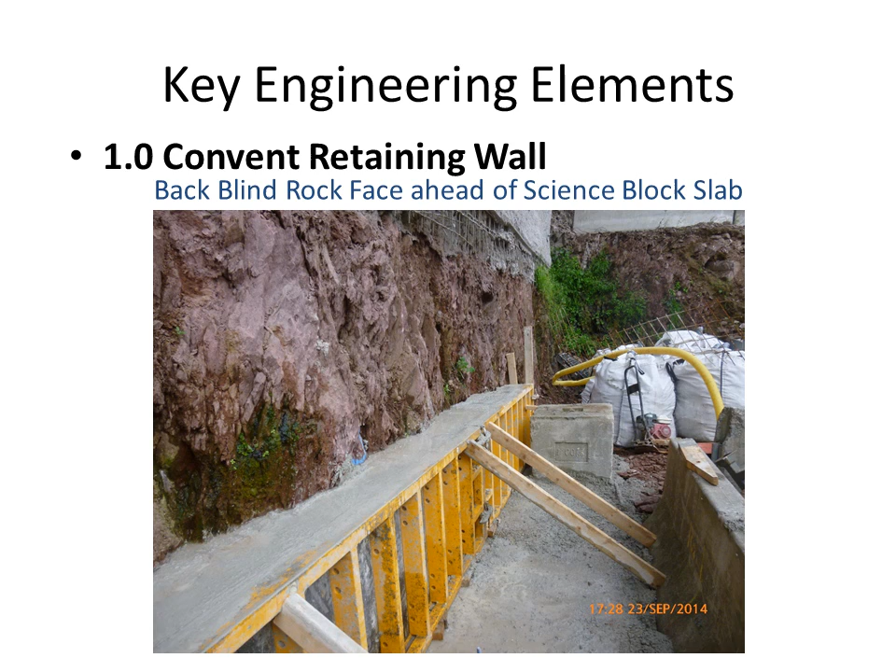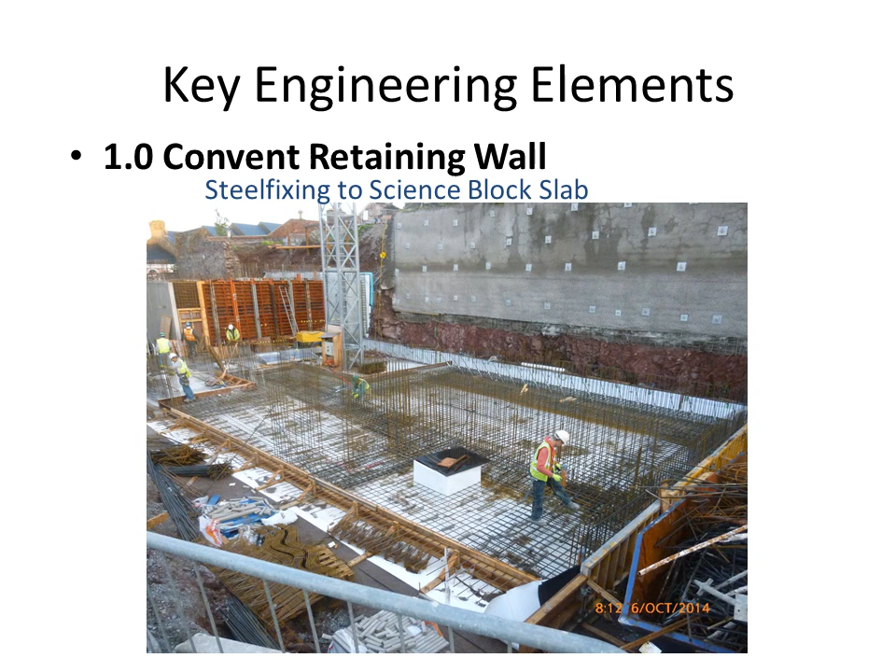The tanking then proceeds underneath the slab. You can see the convent wall there in the background again. Then steel fixing. Then we pour the slab, and the final step here really in closing up the temporary works was, you can see the shutters in place at the base of the shotcreted wall in order to install the back blinding, which essentially encases the bottom of the mesh and finishes up that section of the works.

So a key engineering element on the project is the reinforced concrete. And before we could go ahead and pour and construct any of the RC elements, particularly the fair-faced RC elements, we had to get a couple of things over the line. First of all, we had to get a concrete mix design approved. And this had to satisfy both the engineering and the architectural requirements.

So the engineering specification called up for a C35/45 concrete. It looked for 10 mil max aggregate size, specified the GGBS content, it specified the water cement ratios, and there was no real difficulty in finding a supplier to provide a concrete to match the specification. The real difficulty, I guess, was trying to satisfy the architectural specification.

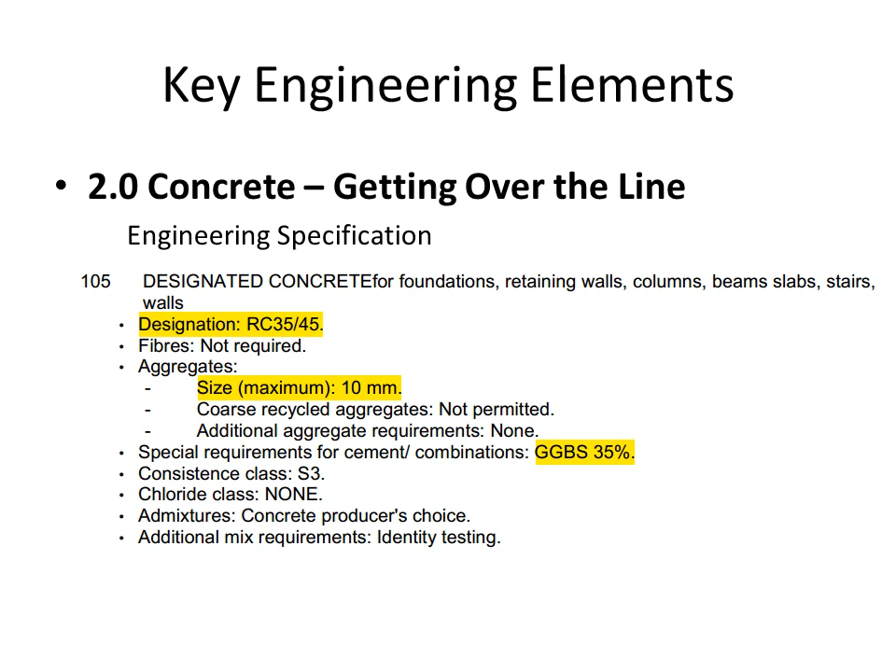So the architects, who were O'Donnell and Tuomey, set out in their specification that a colour sample for the concrete which they held in their office in Cork be matched by the proposed concrete for the project. So they wanted a concrete that was bright, essentially. They didn't want a dark grey concrete, they wanted something as bright as they could. So they had a colour sample in the office, and they wanted the proposed concrete to be at least as bright as what they held in the sample.

So we then went to the various suppliers that we were dealing with at the time to try and get some samples of what they were able to produce. And the architectural sample they had contained Betacarb, which is an additive, essentially a lime filler, which was added to the concrete to essentially brighten the colour of the concrete. Now this is an expensive additive, and we were hoping to not have to use it if we could. So we were able to come up with a mix which was an all limestone mix.

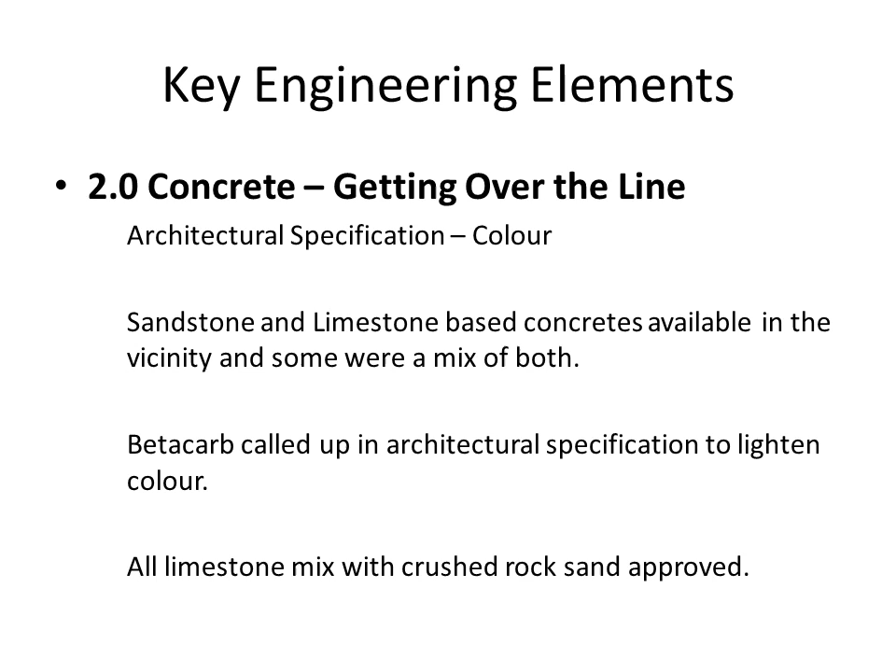And the unique thing about this particular limestone mix is that it used a crushed rock sand. So some all limestone mixes still use washed sand, which still doesn't give you the same level of brightness. But essentially with this mix, you're adding lime dust to the cement paste, which really bears out the colour in the finished concrete.

So we were able to agree on a concrete supplier, and we were then able to submit a concrete mix design for approval. Then we had to get agreement on samples of the fair face finish. So the architects again have called up their finish, the type B finish.

But they've also called up, there's an addendum concrete specification in the works requirements, which calls up other parameters that have to be met by the finish that we have to provide. So we had to then provide 3 or 4 different samples of sections of walls, of fair-faced walls, for the architect to approve.

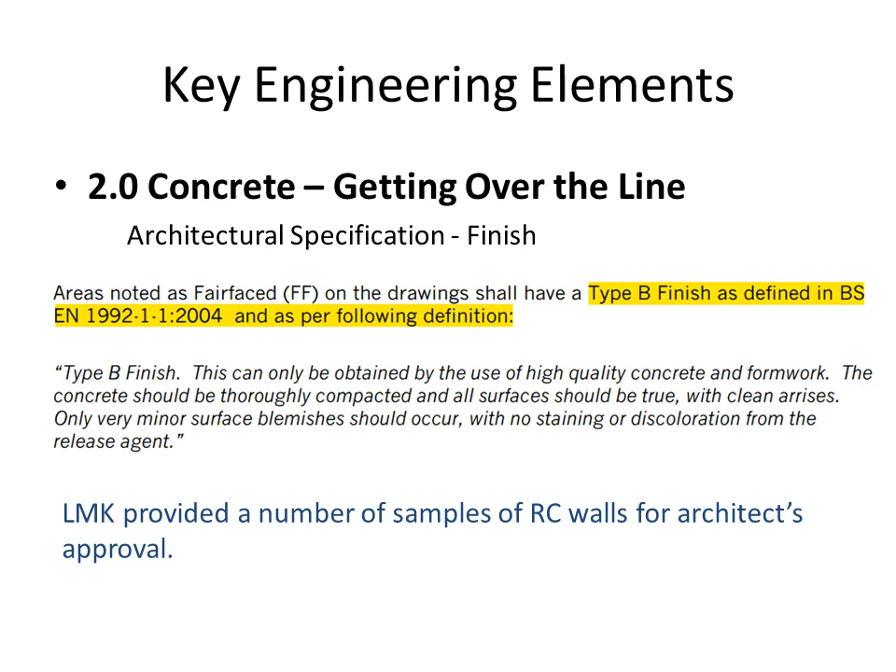And the elements they're interested in is the sharpness of the concrete, that there's no blowholes, the quality of the concrete around the tie holes, and they want to look at the construction joints that we're providing and so on. So once the concrete samples were approved, we then go on to the formwork drawings. So part of the architectural specification again required that the contractor should provide formwork drawings showing all elevations.

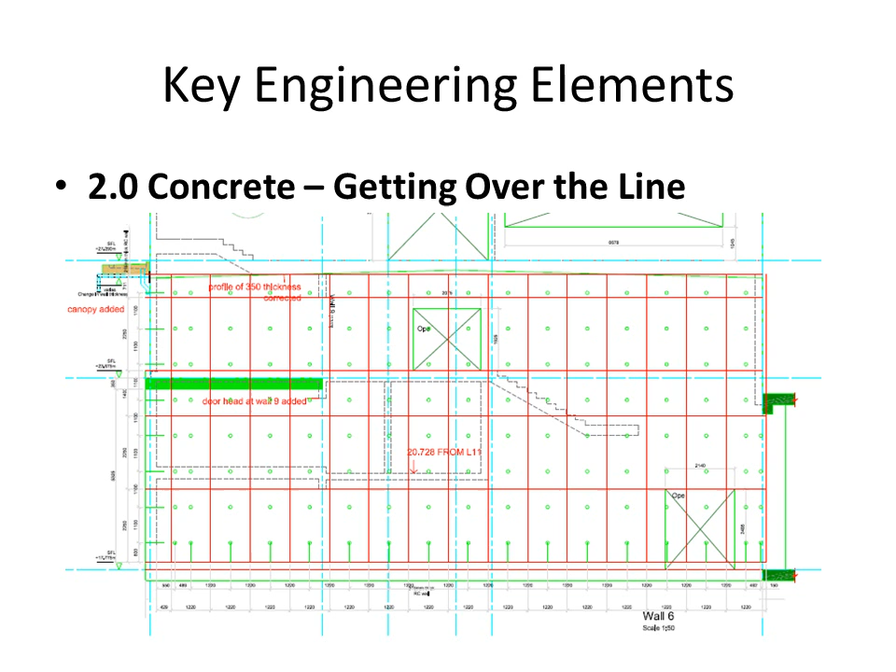So this is the type of thing that has to be submitted and altered and agreed with the architect for each wall. So once the formwork drawings for a particular element were over the line, we could then go ahead and start pouring concrete.

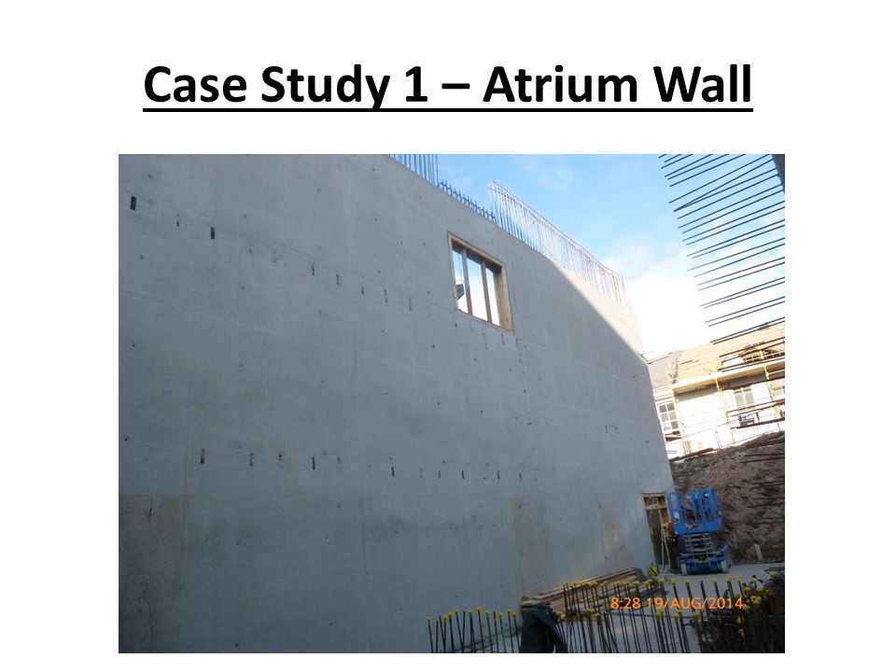So I wanted to just take you through a couple of case studies now in relation to two of the RC elements. The first one here is the atrium wall. Like I was saying, this is the feature wall on the job. It is in the order of 10 metres high, and it's about 20 metres wide. Now, it's located, as you can see here, between the PE hall and the science block basement.

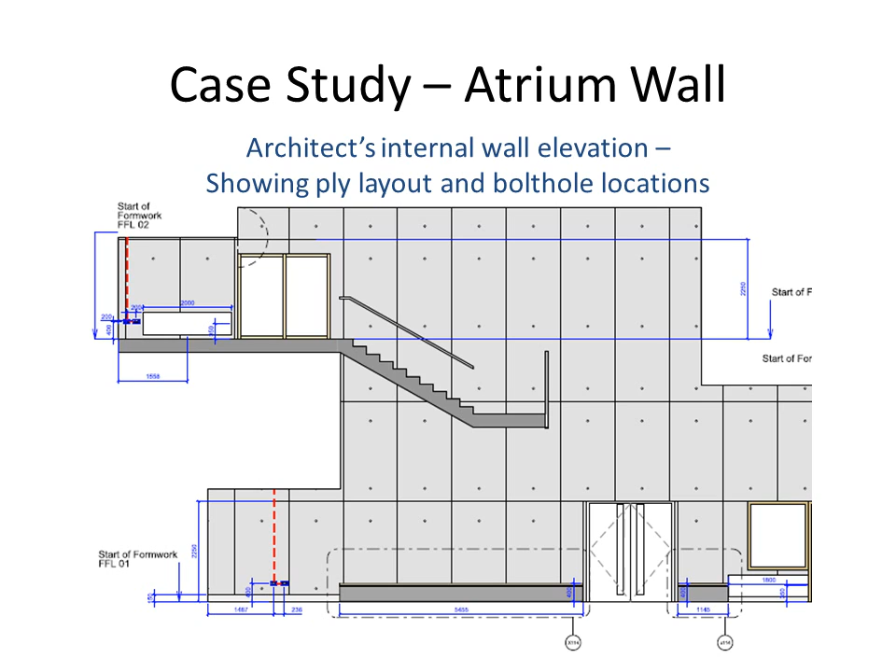But if we didn't do it in a full pour, you would then have to introduce horizontal construction joints or vertical construction joints across the wall. And as it is the feature wall of the project, after assessing it with our subcontractor, we thought the best route was to just try and do the whole lot in one pour, which wasn't without its risk. So the first thing we had to do then was develop a temporary works design for the 10-metre high wall.

The part of the temporary works design that was of most interest to us was the spacing that was required between the ties in the concrete. So the plywood layout sets out, if you like, the spacing for the horizontal ties. The ties are located at the centre of each of the sheets, so they're 1220 spacings horizontally, but vertically it was the temporary works design which was setting out the spacing. So once we knew there was 1100, that was the design parameter, we could then revise the formwork layout to show that. So again, this was agreed with the architect before the works proceeded.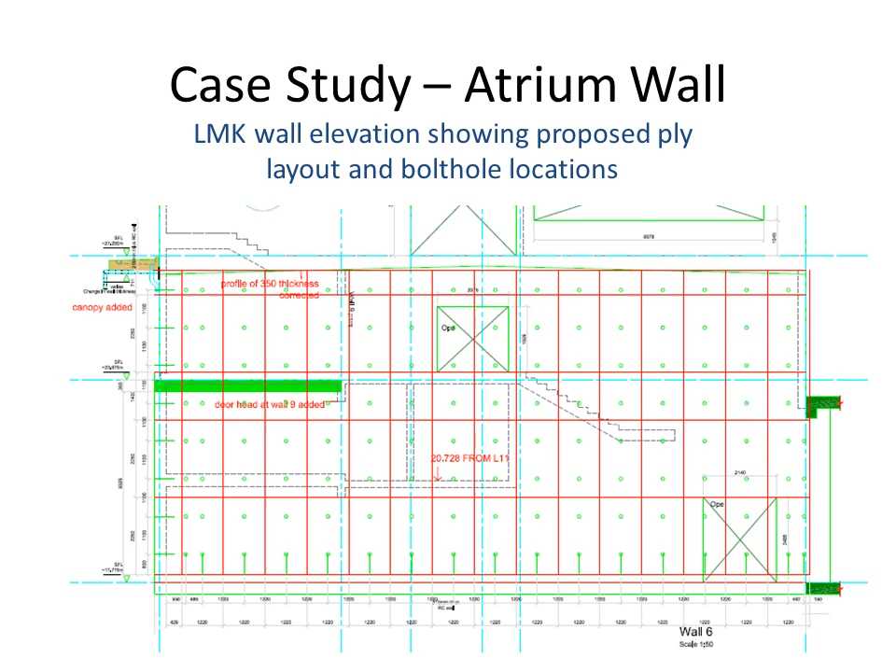Here is a sketch that was done at construction stage, and it's just basically highlighting the various horizontal and vertical elements that are tying into the atrium wall. So there's a number of slabs, walls, landings that have to be accommodated by introducing Conibar into the atrium wall. So Conibar is cast into the wall to accommodate these elements.

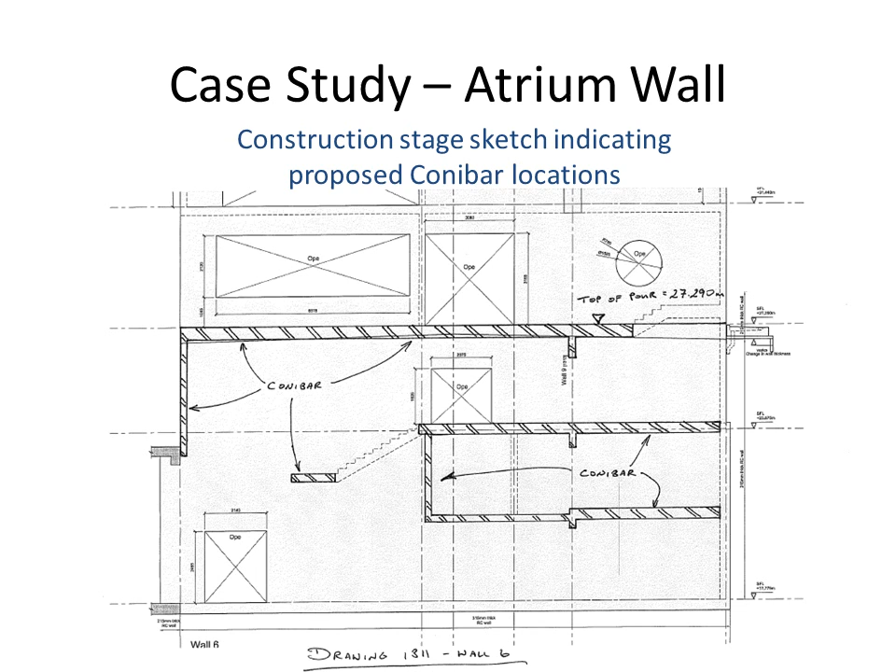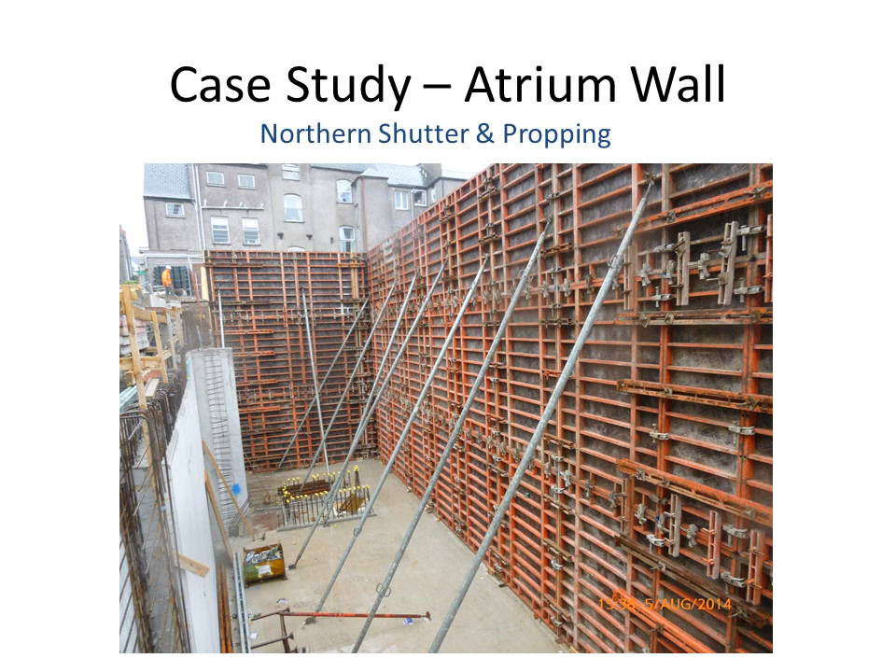So once the Conibar was put in place, we were then able to proceed with steel fixing. And there you can see some of the propping for the shutter to hold it in position. This is the south side of the shutter being closed up, and this is now ready for concrete.

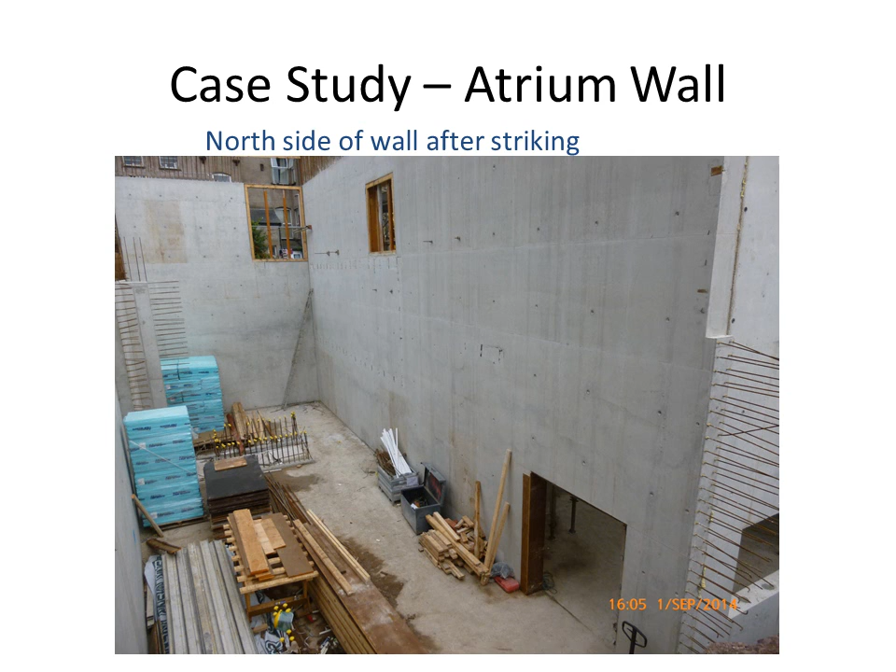So after that, we were able to proceed and pour it. It was poured with a concrete pump and using a 9-metre tremie pipe. And thankfully we were able to get a good quality finish. I'm not sure that the photographs represent the wall very well, but we were very pleased with the result we got on the finish in the wall. So that's it from the north side. And that's it from the south side, from the PE hall side.

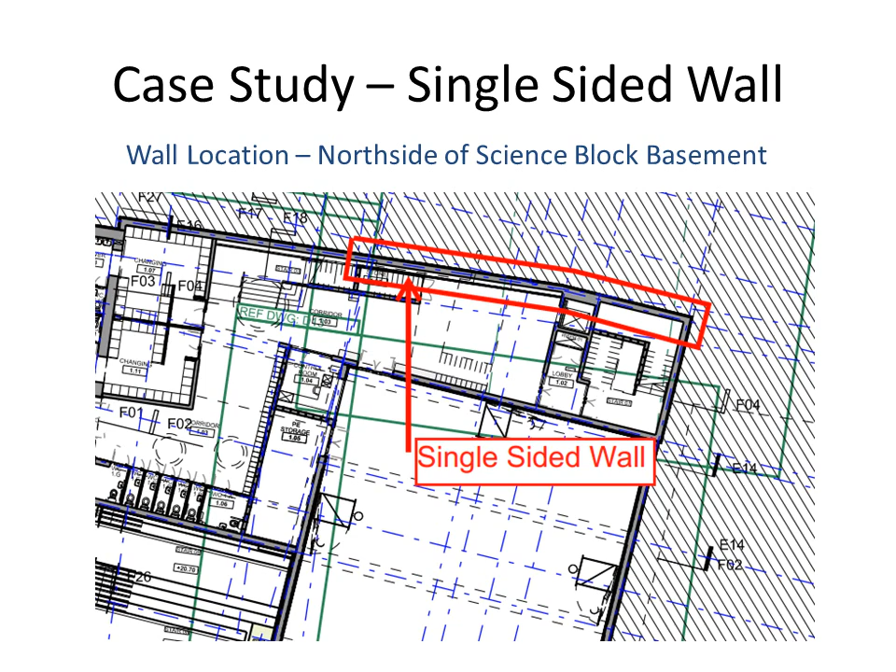The next case study I just want to go through is the single-sided wall shutter system. So essentially there's two ways which we can construct walls, particularly retaining walls. Either the double-sided walls, which I've just gone through, or in this situation, a single-sided wall. This particular wall was located on the north side of the science block basement, so it's immediately opposite the atrium wall. And this is a section through the wall. It's retaining, it's about 5.5 metres high.

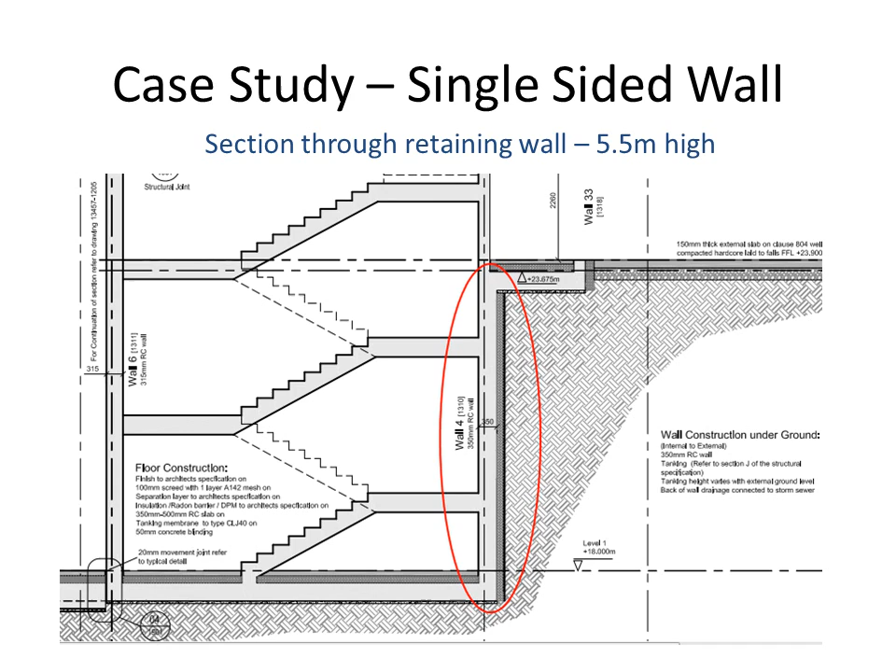Now at this stage we had two options. We could go with a double-sided wall if we wanted to, but that would involve excavating about 1.5 metres or thereabouts of additional material, and the material in this area was hard rock. So we wanted to keep the excavation to a minimum. So we decided to go with a single shutter system instead. So the next step was to complete a temporary works design for the shutter system.

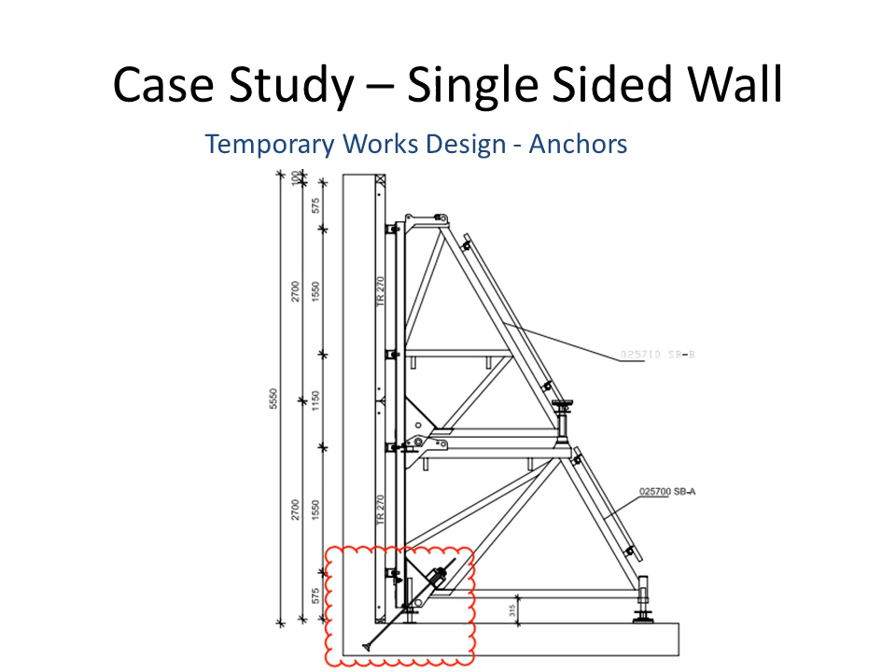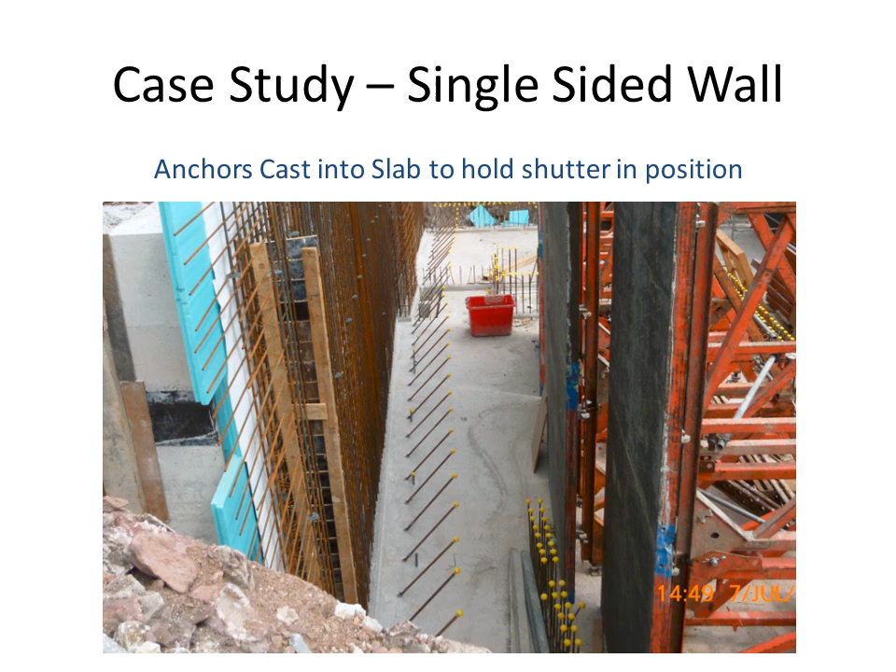So just before we could get to that stage, we had to first back blind the broken rock face. So once the rock face had been excavated sufficiently, we positioned the shutters and then poured concrete between this one-sided shutter and the wall to provide an even smooth face for insulation, a drainage layer, and tanking. And you can see the blue insulation, you can see the tanking system being fixed to the back blinding.

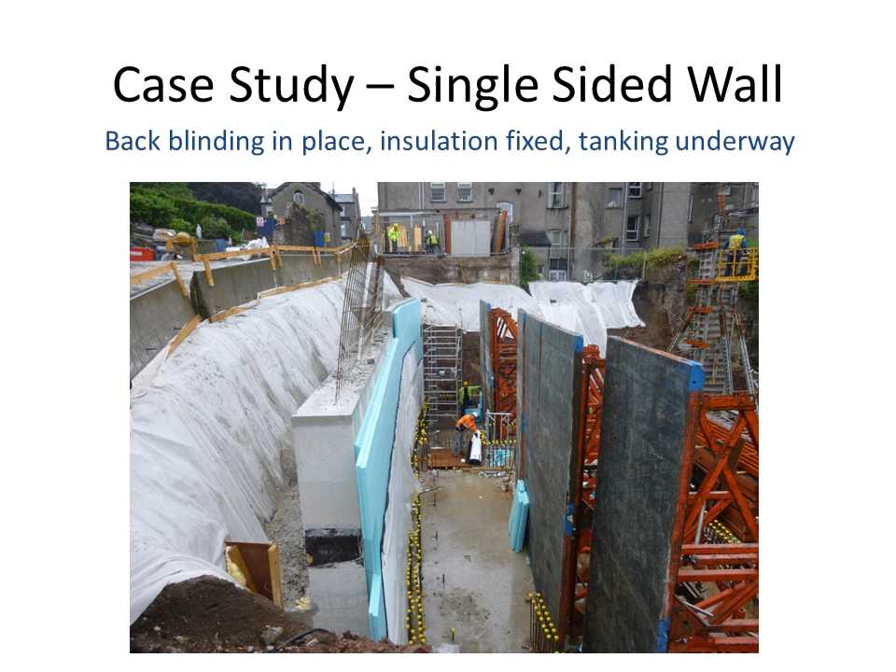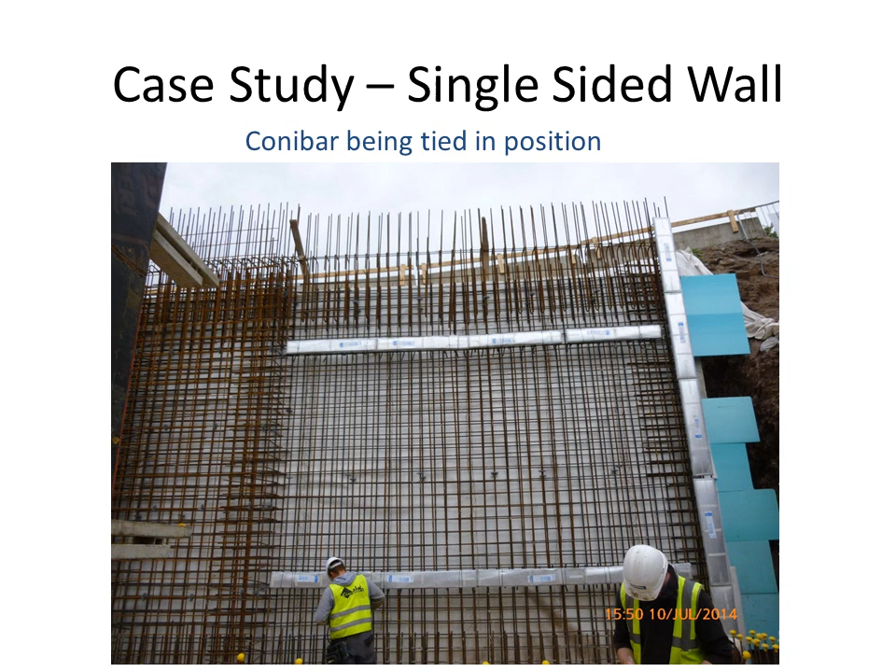So once the insulation and the tanking are complete, we're then able to proceed and steel fix the wall. Again, we have Conibar to be positioned for landings. This zone of the wall is a stairwell, one of the main stairwells in the project. So this Conibar is making provision for the landings that will be connected to that wall. After that, the single-sided shutter system can be put in place and bolted up, and at that stage we're ready to pour the concrete.

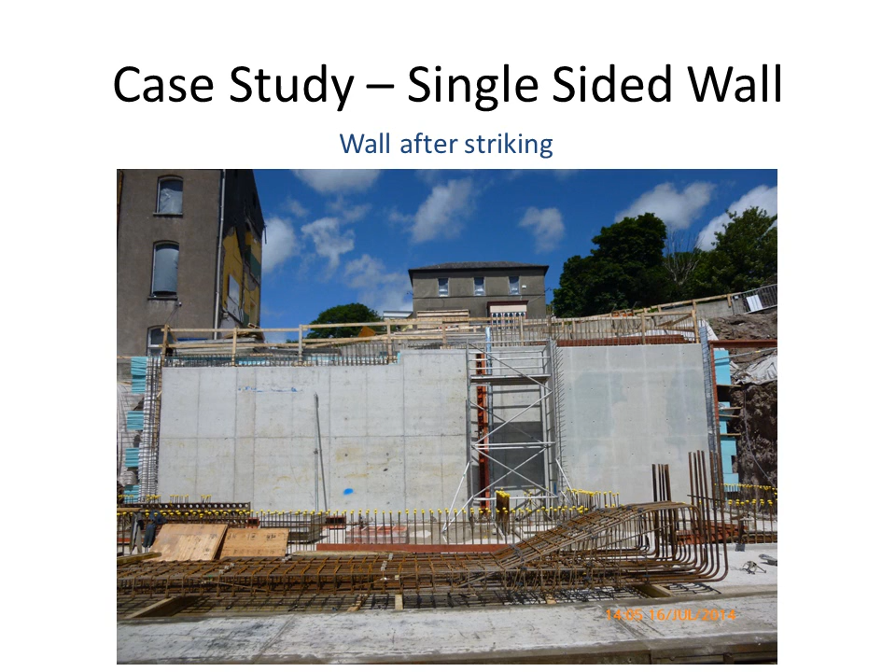Once the shutter is poured, this is the end result. You can see on the left-hand side a non-fair face finish was required in that section of the wall. It's going to be clad in plywood afterwards, but on the right-hand side there was a fair face finish called up. And just going to zoom in here on the finish. You can see a blue bloom that occurred once we struck the shutter. And this was a big surprise to us at the time, because this was essentially the first fair-faced concrete element we poured on the job, and it was critical to get it right.

And when we saw this bloom or this staining, we didn't know what it was at the time. But we got some advice. I see Henry Kerr in the audience there, and we were talking to the Irish Concrete Society at the time. And this is a phenomenon that occurs with high GGBS content concretes, and it was probably accentuated by the fact that the other side of the wall was heavily insulated. It has happened to us periodically through the job, but the staining generally does just fade back after a number of weeks. And I'm happy to report this did too.